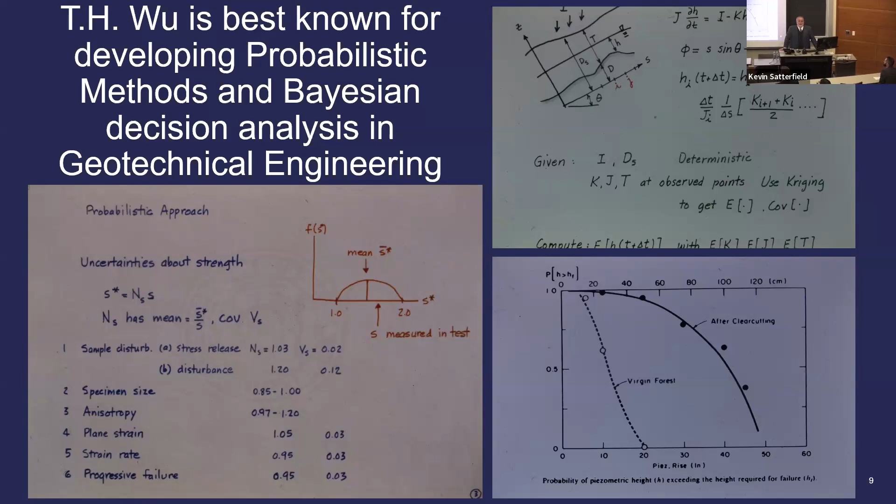Today, he's probably best known for his Bayesian decision analysis and the field many people today call georisk. There are conferences held on a routine basis. This is one I attended in Taiwan in 2019, where he was really honored, and everybody recognized that he was at the origin of what we sometimes call geotechnical reliability.

I loved his very simple 35 millimeter slides, almost all black and white, hand drawn, clearly showing the effect of groundwater, clearly showing the effect on stresses, and also how thorough he was. He would look at the effect of wind, for example, on the trees, the effect of reinforcement, the effect of changing angle of the roots as they're being pulled, and in many other areas he also had significant contributions.

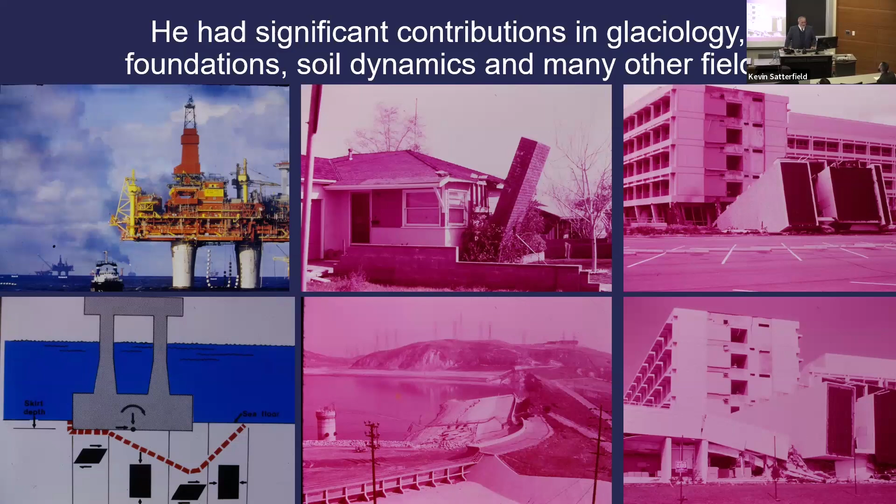He spent several months in Antarctica and wrote papers contributing to the field of glaciology. Through his life, I was able to see that he worked on areas I did not expect, like offshore platforms. But he also had a keen interest in the emerging field in the 1970s of soil dynamics, what later became geotechnical earthquake engineering. He wrote in 1975 a well-known and seminal book called Soil Dynamics, and a lot of the pictures involved, for example, the San Fernando Dam failure in 1971 in Los Angeles, the failure at Olive View Hospital. So he had many interests, not just related to georisk or biotechnical remediation.

He retired in 1994, but he remained constantly involved with the campus.

Even in his 90s, he would never take the elevator. He'd go the 4 floors of Hitchcock. If you wanted to hide from Th. Wu, one student told me all you had to do was go into the elevator.

I talked to him several times about his research. He was still doing research, still writing papers, and still working on the manuscript of a book.

One time I remember he came to me and said, Daniel, I need a genius. That's what Th. Wu would typically call students on campus - they were all geniuses. I said, what do you need a student for? He said, well, I have this slope that I reinforced for ODOT many years ago, and I'd like to go read some of the instrumentation. He was, I think, 89 at the time.

So I found a good student and told her, make sure you carry everything up and down the slope, make sure you take all the readings - he's 89 years old. The student came back and I asked how it went. She said, he didn't let me do anything. He was up and down the whole time, taking all the readings himself. I was just there watching.

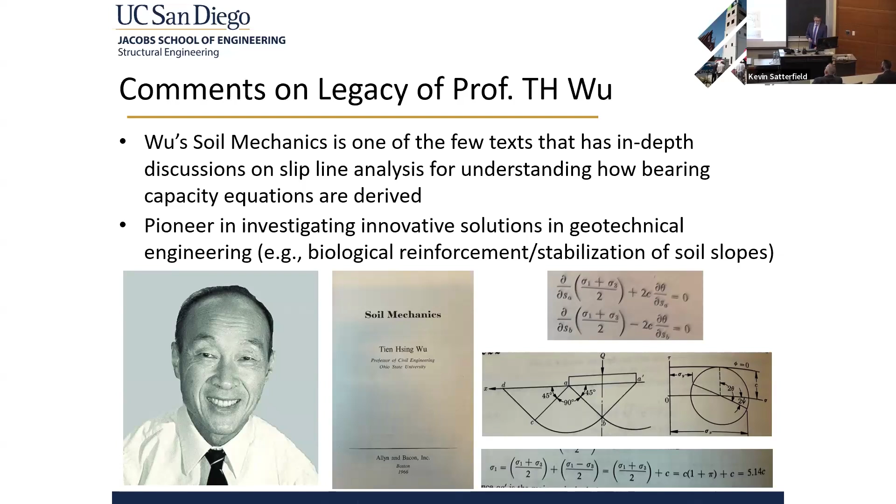These were both performed back when I was a professor at University of Colorado Boulder - one at U.S. Air Force Academy, and the other in downtown Denver. One focused on the response of single piles, and the other on the response of energy piles under building operations.

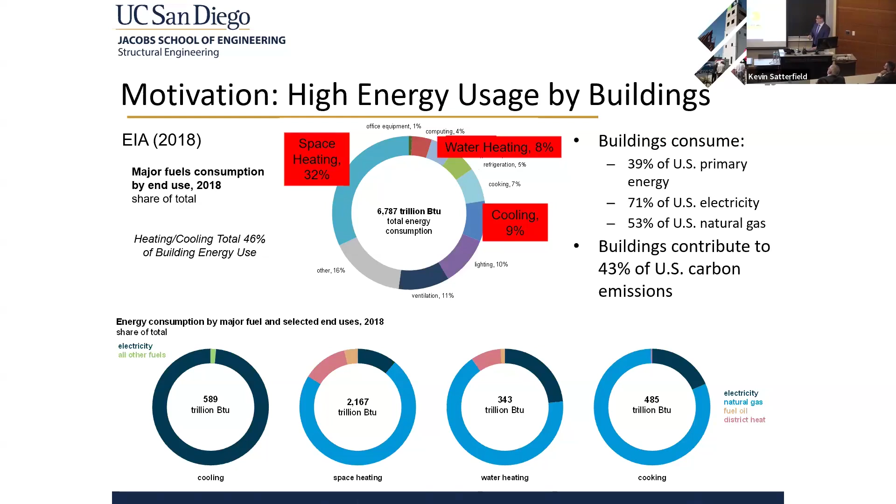I also wanted to talk about thermal energy in urban areas and some questions we have. We need heat for our buildings, so how can we obtain that thermal energy sustainably? Energy piles are the strategy I'm going to talk about today. But we also have a lot of thermal energy coming from the sun - are there ways we can harvest that heat and inject it into the ground to store it? There are some opportunities there, and energy piles are a good way to do that.

There are some risks if everybody adopts energy piles and every building has them - potentially we could have waste issues. We need to make sure that if we're rejecting a lot of heat to the ground, we're not contributing to the urban heat island effect. But energy piles are a good way to move heat from one place to another, so there could be strategies to take care of that. That waste energy could also be a resource we use to achieve other purposes, as I'll talk about in a second.

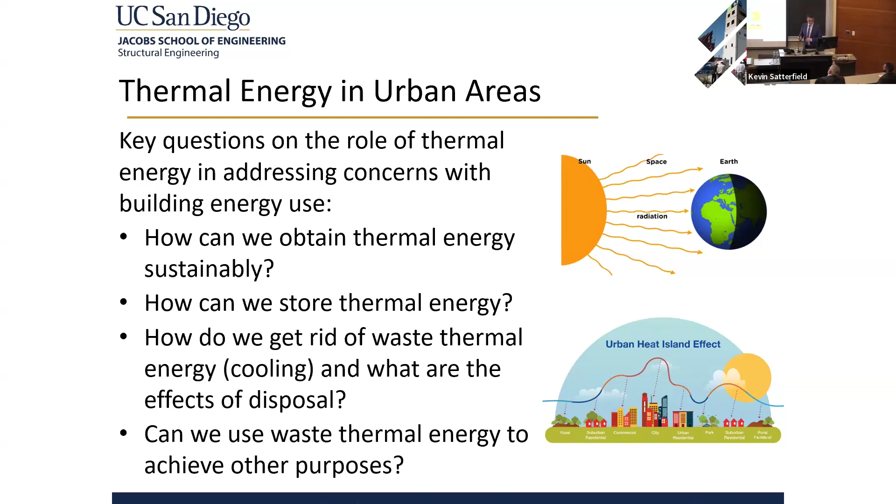Thermal energy comes from the sun usually, but the subsurface can play a key role in handling this. The subsurface is usually a good insulator. Soil has a mixture of air and water, and air is a very low thermal conductivity material, so it acts as an insulating material.

Heat transfer in soils can occur due to both conduction as well as pore fluid movement. If we have saturated soils, we could have groundwater flow that could take the heat away. If we have unsaturated soils, you don't have that groundwater flow, so there's more of an insulating effect, but you could have phase change, and that could lead to some interesting effects.

Mainly, geotechnical engineers, which is what we are, what I am, we're installing structures in the subsurface that we could be using for multiple purposes to transfer thermal energy.

So I've been trying to categorize thermal energy into 3 different categories. Thermal energy is a resource, so we can use this to transfer it to and from the ground to our building for space conditioning and displace technologies that may rely on burning fossil fuels.

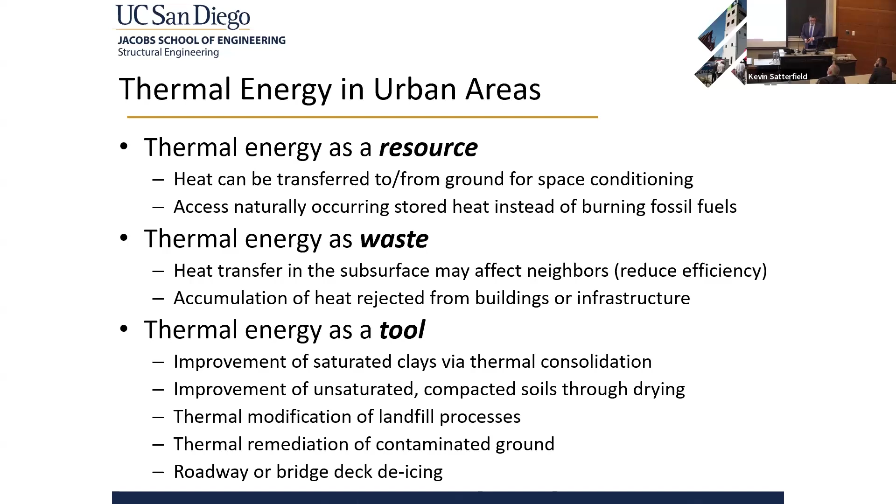The first is the improvement of saturated clays using thermal consolidation. And the second is using thermal drying to enhance the behavior of unsaturated compacted soils. There are other opportunities, modifying landfill processes, de-icing bridges, remediating contaminated ground that I'm not going to talk about today, but are other potential ideas.

One of the main tools that we're going to be using in energy piles is this concept of a ground source heat pump. When you think of geothermal energy, you're not necessarily generating energy. You're moving it from one place to another. And the heat pump is the tool that we're going to be using to do that.

We have two different loops, one in the ground, we call that the ground loop, and then we have our refrigerant loop. Three, if you want to consider the system that is distributing the heat to your building. The refrigerant is going to exchange heat as it changes phase as it expands and contracts. And we're going to be using that to extract heat from the loop that's going in the ground.

So when we want to heat our building, we're going to inject heat into the ground and extract, or we're going to put cold water into the ground and hot water is going to come back. And the refrigerant, we're used to using these in our conventional air source heat pumps that we have for air conditioning purposes.

But when we have an air conditioner, it's probably 40 Celsius outside, and we want our house to be 20 Celsius. So we have to reject heat at a much higher temperature so that we have heat transfer out into the environment. The ground is having a stable temperature all year round. So if you want to have your house at 20, you're just rejecting to that stable temperature, so that makes it more efficient. And if you install enough pipe in the ground, you can make this work in any location.

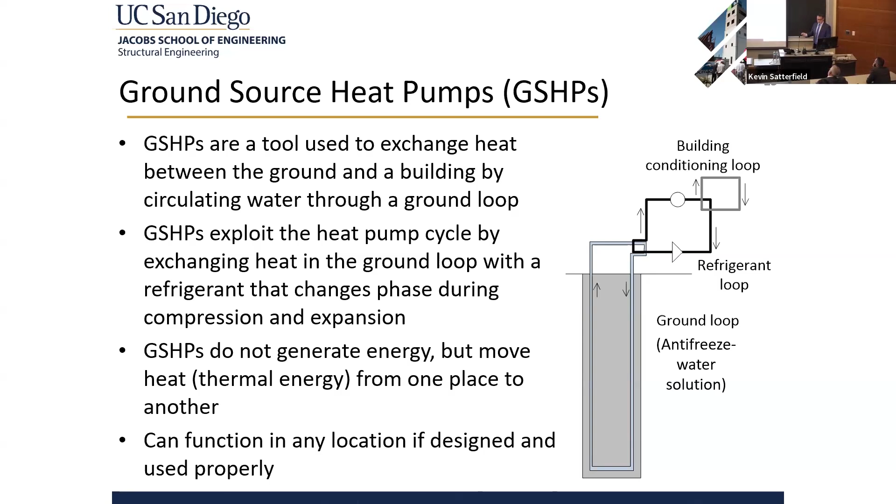These are just some more details of the refrigerant system, and noting some of the typical temperatures of the fluid when we're injecting into the ground. So when we're heating the building, we're injecting cold water into our ground loop, somewhere close to freezing, so we need to have an antifreeze inside of the ground loop.

When we're trying to cool the building, we're going to put hot fluid into the ground, and it's going to come back a little bit cooler. In most locations, the ground temperature is going to be equal to the mean annual air temperature, somewhere 10 to 15. San Diego is a little bit warmer, around 20.

Talking about energy piles, these are basically structures that serve two purposes. We're going to support the building, and we're also going to have heat exchange loops inside of them. These are closed loop pipes, usually polyethylene plastic, so it's flexible.

One nice thing is that because you're inside of the building, you don't need to provide trenches to go below the frost depth. You need to have all of your heat exchange pipes at the surface, connected together in a manifold and routed through the building foundation to a mechanical room.

These have all been studied for quite some time. I think the first applications were in the early 1980s in Austria. In the late 2000s, there started to become several research projects in the US, including one that I started at University of Colorado.

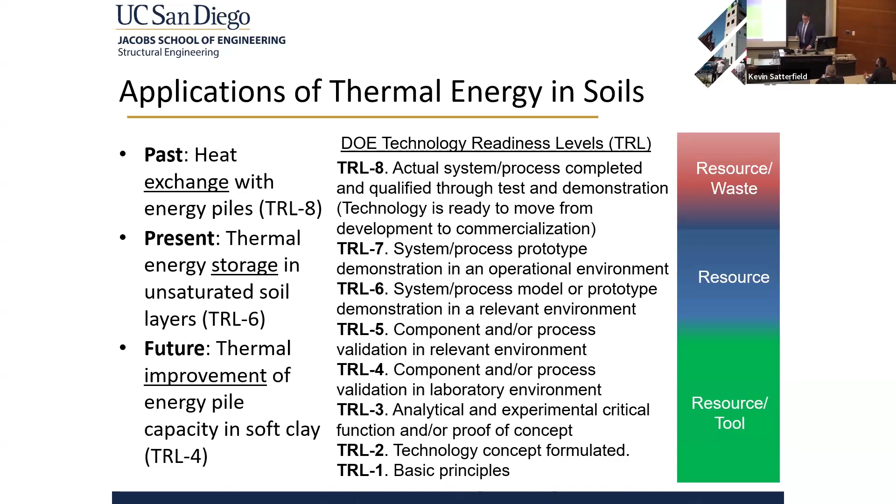So how are we going to design ground source heat pumps and energy piles? I mentioned that you need to have a sufficient length of heat exchanger in the ground so that when you send heat pulses from your refrigerant loop, they can be absorbed by the ground without changing the ground temperature. So this is the philosophy of heat exchange.

Heat storage, you want the ground temperature to increase. You want to store the heat in the ground. But for heat exchange operation, we want to be able to send pulses of heat, and then they get distributed to the ground without causing the ground to heat up. We also want to avoid thermal overlap between other heat exchangers.

These are some different rules of thumb that you can use for preliminary designs of these systems. Usually you need about 150 meters of heat exchanger per thermal ton, and the thermal ton is the amount of energy you need to heat or cool a space.

Energy piles are a little bit different than borehole heat exchangers because we're not going to make our piles longer to get more heat exchange capacity. The piles themselves are very expensive. The addition of the heat exchange tubing is only a fractional cost on top of that. So we're usually going to design the piles based on their structural requirements, and we're going to get whatever length we can have inside of the pile from that.

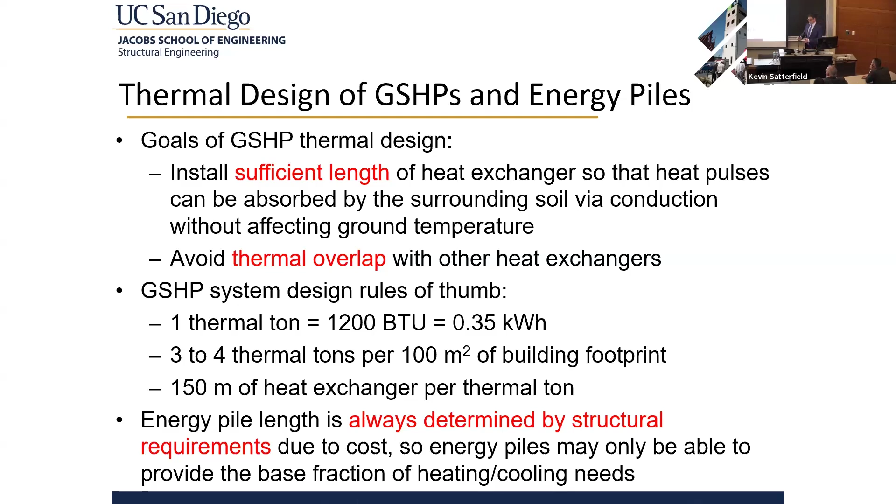There's been some different studies on the configuration of the heat exchangers to get the maximum energy out of it, but I'm not going to talk very much about that here. There's many different studies that have been performed. Mostly analytical solutions are the first pass, but there's been a lot of work on thermal finite element or finite difference approaches for heat exchange.

These are just some different references on the ranges of thermal conductivity that we're going to encounter. One of the limiting factors is this plastic pipe that has the lowest thermal conductivity out of the system. The fluid flowing through the pipe, we need to have a fast enough flow rate that we have turbulent conditions, so we have good mixing.

If we had laminar conditions, then you may have a stall out of the heat transfer across that fluid, so it needs to be mixing so that you evenly distribute the heat to the edges of the pipe, and then that gets distributed to the concrete and the surrounding soil. Soils usually have a pretty low thermal conductivity, and if they're dry, the thermal conductivity is lower than if they're saturated.

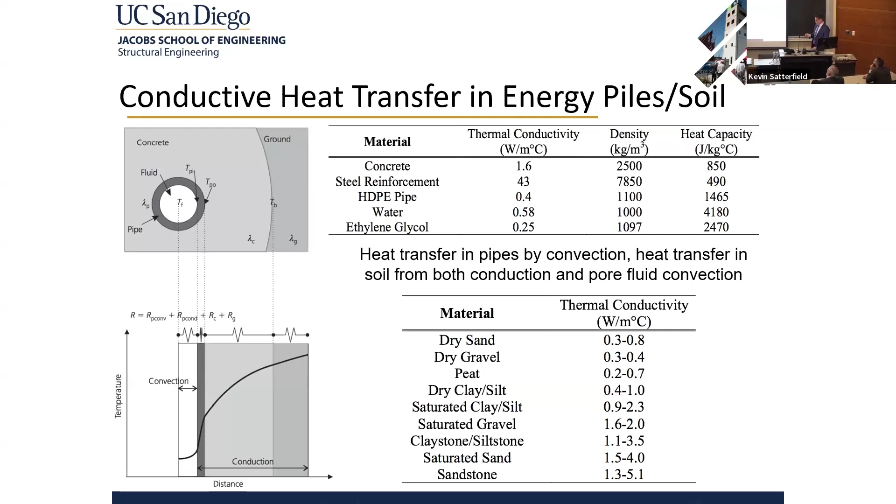One of the main ways that we quantify the system, as opposed to these individual components, is using a thermal response test. I'll show some results of these later. In general, people found that the length to diameter ratio for an energy pile is relatively small, but they have high heat transfer, mainly due to the density of the materials and also the geometric factor. So in these thermal response tests, you inject heat at a constant inlet temperature, and then you measure the outlet temperature as a function of time. From that, you can figure out the system thermal conductivity.

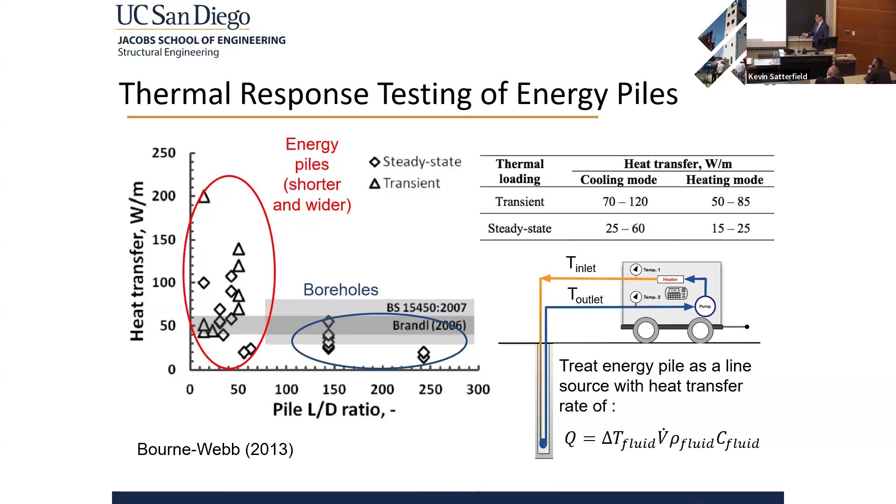The other thing that you need to think about is, yes, we're exchanging heat to and from the ground, but we're also going to have thermal expansion and contraction, and those are going to lead to thermal-induced displacements.

This is kind of the main thing that I was interested in when I started working on this. The tricky thing is that the restraint provided by the base, the toe restraint, and the building are going to prevent those displacements from happening. So if you prevent thermal displacements from happening, you convert them to stresses. We want to make sure that any stresses that do occur are within reasonable limits, the capacity of the pile and the strength of the concrete. And if displacements do occur, we want to make sure that they don't cause structural or architectural damage.

So these are just some schematics. We use different sign conventions than in structural engineering. We're using positive stresses for compression, positive strains mean contraction, and positive displacements are downwards. So if you're loading the pile from above using a compressive load, everything is positive, because that's the most common way that you're loading a foundation.

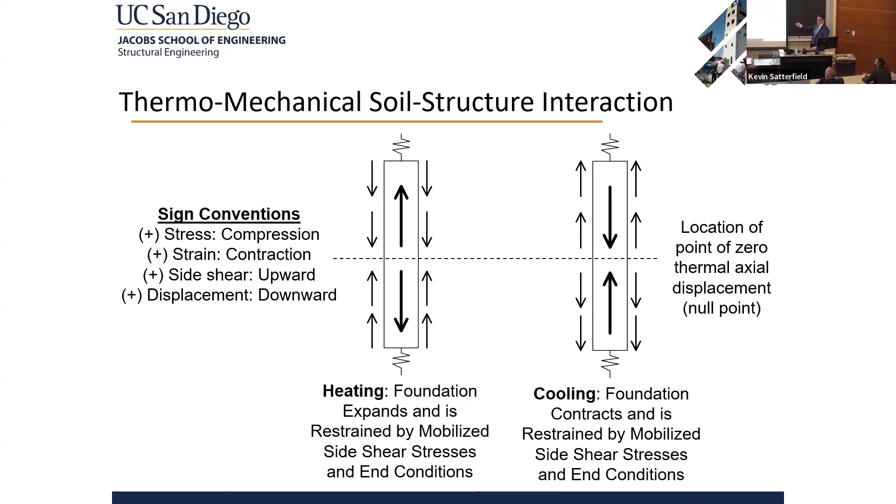When you heat the pile, it's going to expand about some point that depends on the boundary conditions. We can represent the end restraint using a spring and the head restraint where your building is by another spring, and then some other springs on the sides to represent the shear stresses acting on the pile. Depending on all of those conditions, it's going to expand about some certain point, and that's going to be the point of zero displacement, with the maximum displacement at the ends. When you cool the pile, it's going to contract towards that same location. We're going to call that the null point, the point of zero displacement.

These are just some simple cartoons that we can use when we start to see the data to put this into context. If we have a floating pile, one without any end bearing, we apply a load to it, and it's going to be dissipated with depth. This is just a linear distribution in axial stress. When we heat it, it's going to expand about that point and add some additional compressive stress to the pile. If we add the mechanical and thermal together, you get an increased compressive stress in the pile. You can also see that the upper part of the pile is going to be unloading, and the lower part of the pile is going to be loading even further.

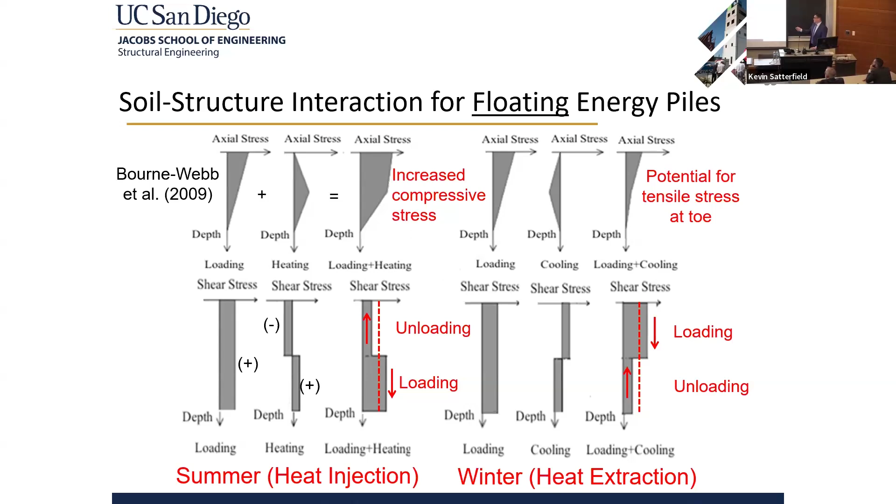So if you're trying to do a load transfer analysis, you need to make sure that you know which direction each part of your pile is going. When we're loading the pile mechanically, usually everything is moving downwards, but now it's a little bit more complicated. During cooling, you have opposite tensile stresses superimposed on top of your mechanical stresses. So one of the risks is that you could potentially have tensile stresses in the base of the foundation, and that could be a risk for auger cast piles where maybe the base of the foundation is not reinforced.

When we have realistic end-bearing restraints, it's going to change the shape of this stress profile. There's no restraint at the head and strong restraint at the toe, you're going to have this shape. Strong restraint at the head and none at the toe, it's going to have this shape. We'll see this in some real data in a second.

We have two different options to try to analyze those cartoons that I just showed. We can use coupled thermohydromechanical finite element analyses. These are good because you can interpret what's happening in the soil as well as in your pile, but it requires a lot of parameters and very advanced constitutive models, and validation can be very complex. So kind of the preferred method when you're designing these is the simple load transfer analysis using nonlinear springs to represent the side shear and end bearing.

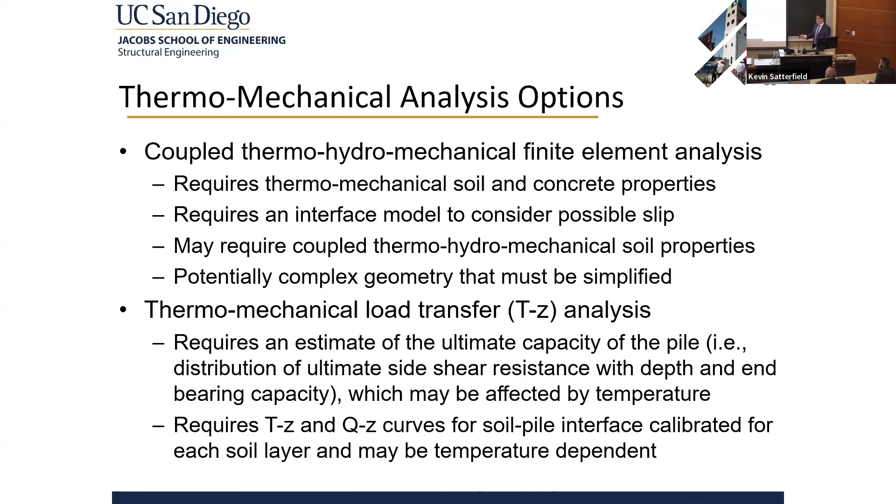Speaking of the effects of temperature on soils, I'm going to show some of these later in the presentation. We're going to have heat transfer from our concrete pile into the soil, and it depends on what type of soil we have, on what behavior we're going to obtain. If we have saturated soils, one thing that happens is that the water inside of the pores is going to expand 8 times more than the solid grains. So you can obtain this thing called thermal pressurization, especially in clay soils.

Depending on the stress state, as pore pressures dissipate, we could have thermal contraction. There's also some changes in the yield stress of the soil. When we heat it, usually the yield stress decreases, causing thermal softening, especially in overconsolidated soils. But this volume change due to outflow of water in normally consolidated soils causes hardening and an increase in shear strength. So in the last example, I'm going to focus on these normally consolidated soils, and we're going to see when we heat them, it causes contraction and an increase in shear strength.

This is kind of different than you'd expect for concrete or steel. When you heat them, they're always going to expand. But soils, depending on their stress state, could contract. Kind of a weird behavior.

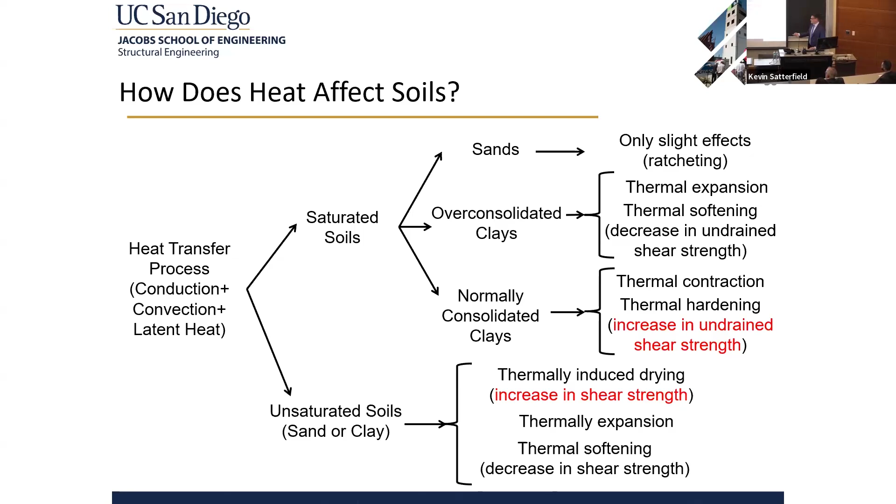Unsaturated soils are very complicated because when you heat them, you're going to cause phase change, and water is going to flow away from your heat source. That's called thermally induced drying. That's going to lead to an increase in suction and an increase in shear strength. You're still going to see a softening effect, but the increase in shear strength is greater than the softening we see. I'll also show some examples of tests where we observed that.

In addition to these coupled processes that have many parameters, we need soil-pile interface characteristics, which anybody who's worked with piles knows are very tricky to obtain, and the disturbance during installation really makes them difficult to predict without doing a load test.

I'm going to show some results of load transfer analysis instead, where we represent our pile with a set of linear springs, and then nonlinear springs at the toe and along the sides. One of the tricks here is that we need to input the ultimate pile capacity, which could be affected by temperature.

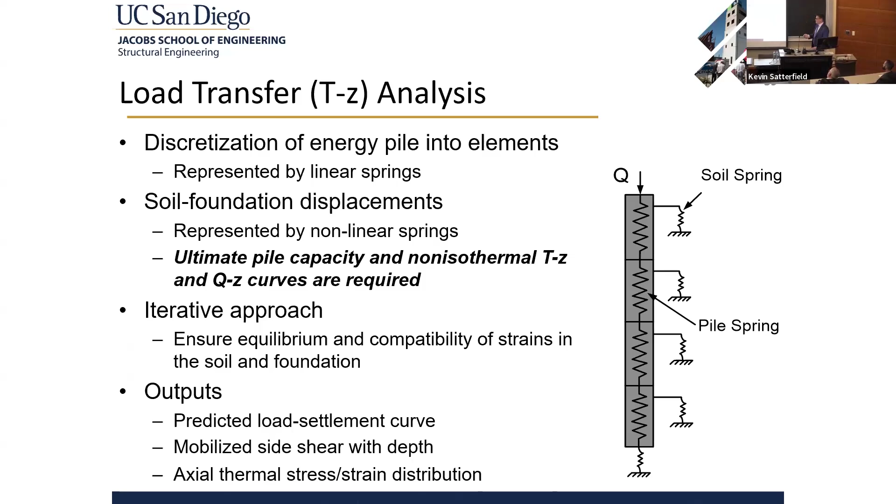The nice thing about these load transfer analyses is that it gives us our predicted load settlement curve if we do a mechanical loading test. It tells us about our mobilized side shear, and about the stress and strain distribution within the pile. Hopefully if we validate these enough with data, we can be using this readily in design.

We need to think about the effects of drainage during mechanical loading. Is it going to be an undrained material or a drained material? So we have a choice for undrained or drained. And then we need to think about the strengths that are going inside of those, the effects of temperature on the shear strength before the mechanical loading occurs.

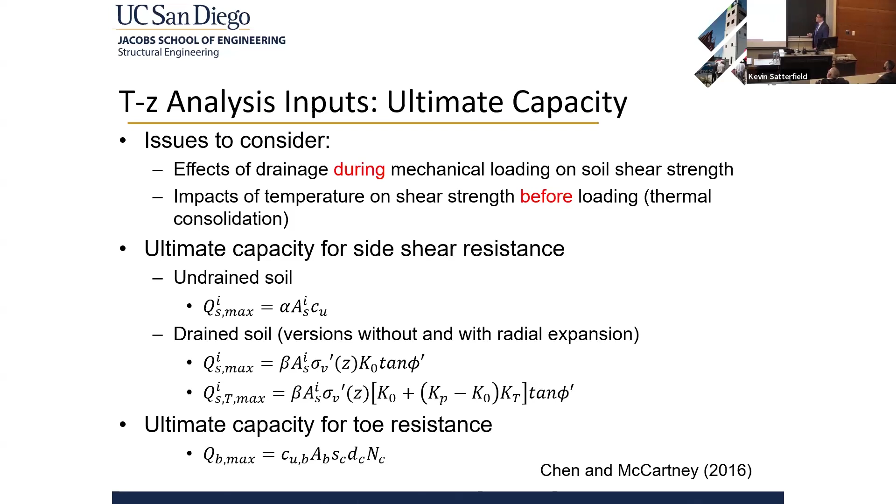Mechanical loading, these are easy. You usually apply a displacement at the toe and then iterate until we reach equilibrium. You apply the displacement at the toe and you can figure out what the load is at the top and go from there.

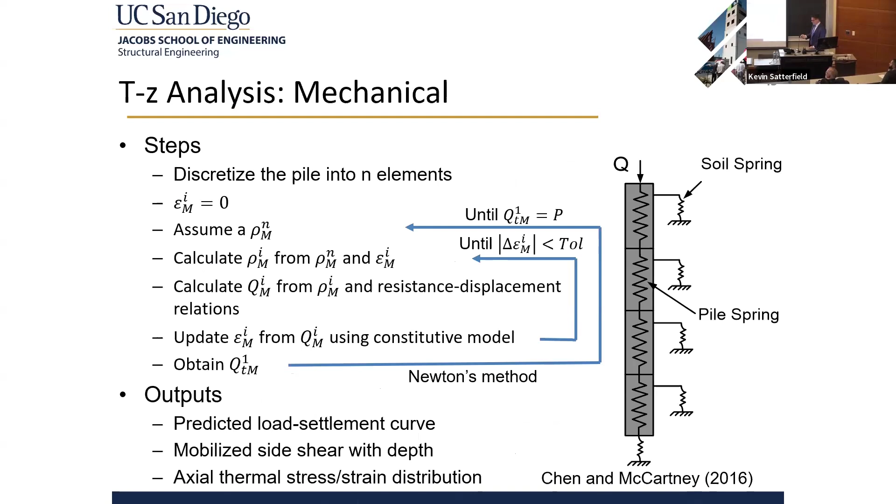When we do the thermal load transfer analysis, the interesting thing is that we need to have an additional spring at the head of the pile. And then we also have this concept of the null point, which is a point where there's no displacement. Different from the mechanical case where we apply a known displacement to the toe, we need to first make a guess at what that null point is, and then start to apply displacements from that point, thermal expansion from that point.

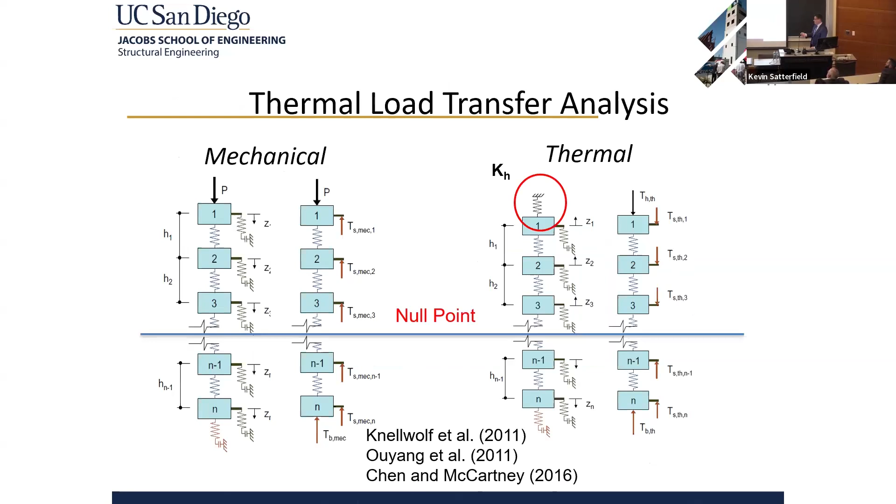If you heat the pile, it's going to expand by alpha delta T, where alpha is usually around 10 microstrain per degree C. We can use equilibrium of the pile to figure out the location of the null point, which is going to depend on the stiffnesses of those two springs.

When we have side shear, it makes things much more complicated. So we need to guess where the null point is, start with initial values from our mechanical TZ analysis, and apply an alpha delta T for each element. Alpha delta T is the amount the pile would expand freely if it was not restrained, but it's going to be restrained by side shear, so we need to adjust that until we find the actual amount of thermal strain.

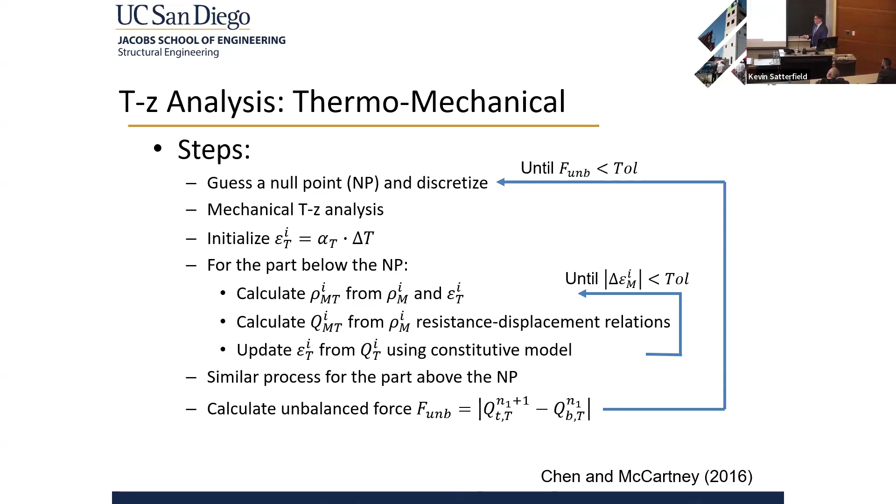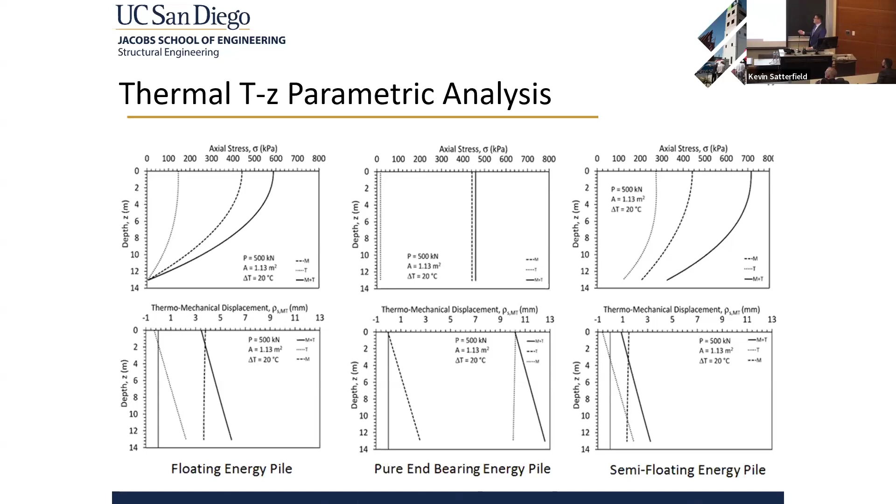If there's no restraint at all, the entire pile would just expand by alpha delta T. If there is restraint, it's going to be less than that. So we can go through some different examples. I'll show comparisons with field data later, but these are examples for a floating energy pile where there's no restraint to the toe, a pure end-bearing pile where there's no side shear, and a semi-floating energy pile, which is probably most realistic - high stresses at the head and low stresses at the toe.

Going on to a couple of the case histories. The first one is a shower shave facility constructed at the U.S. Air Force Academy. I worked on this with Professor Karen Henry there. An interesting thing about this project is it was a one-story building - it didn't need to be on deep foundations, but as part of our project they were able to add these foundations to their scope. I always joke that this is the strongest bathroom in the world, so if you want to visit, it's still there.

We had a series of 8 15-meter energy piles around the perimeter of the building. The Air Force Academy has an interesting program where, before they've taken any classes, they go out to this place called FERL, the Field Engineering and Readiness Laboratory, and they build things - retaining walls, excavations. They see how it works, then go back to the classroom and learn. So we gave them a nice bathroom that is warm, I hope.

The area there is mostly sandstone, with a little bit of sandy soil near the surface. We used a dry hole approach for the drilled shaft construction. I found out after we installed them that these were installed by a water well installer instead of a drilled shaft installer. Water well installers just want to go deeper than their required depth, so this driller drilled past our 15-meter limit and left loose material at the toe of the pile - loose sand at the toe. In the normal dry hole approach, you make sure you have a nice flat material at the base. We didn't need this for the capacity of the foundation, but it added some complexity when we looked at the results later on.

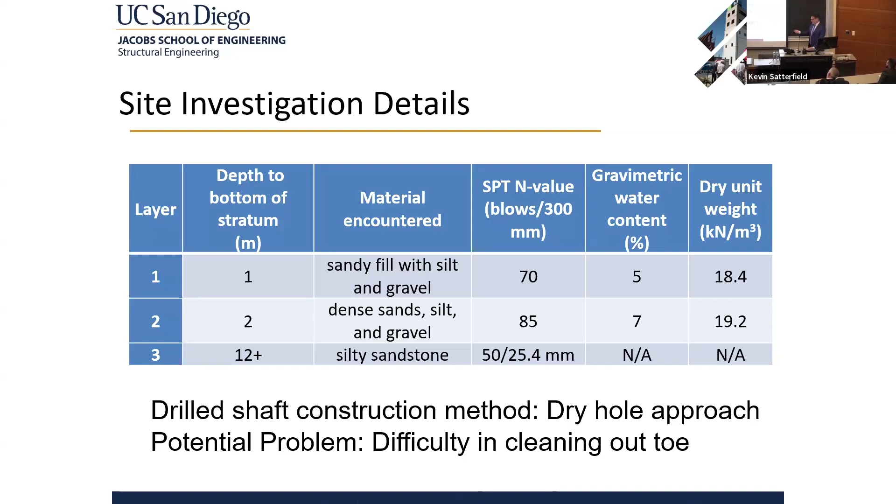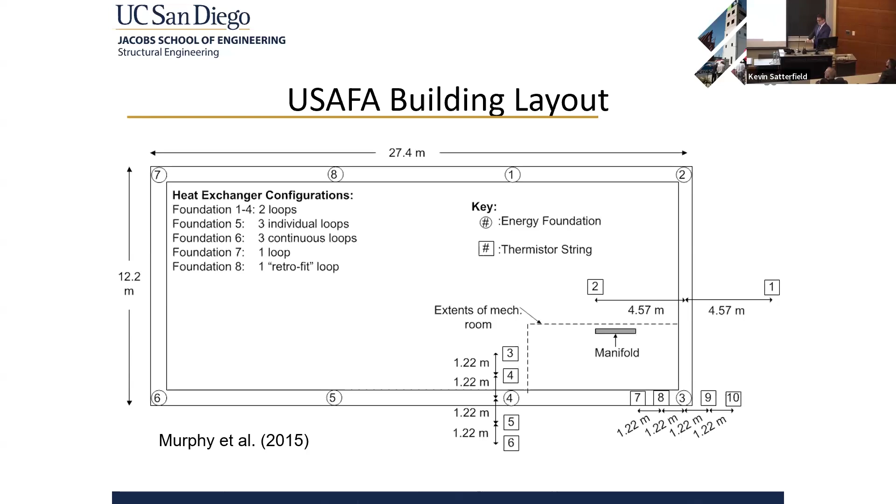So here's the layout. Two of the piles have instrumentation off to the sides, and piles 4, 3, and 1 have strain gauges throughout their depth. These were 24-inch diameter piles, relatively narrow, but you can see the pipes on the inside of the reinforcement cage. One of them we were looking at as a retrofit, where you would maybe core down through your pile and install a vertical heat exchanger into the middle.

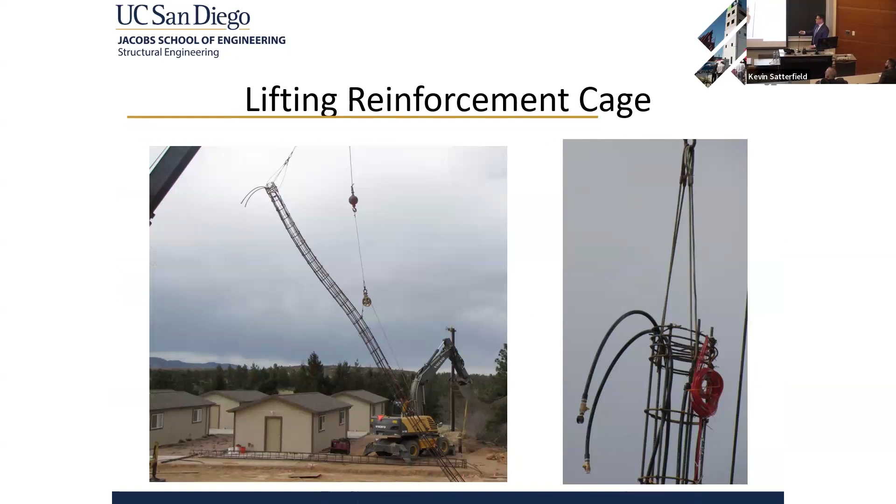To replicate that, we just had a pipe in the center of the pile that we inserted the tube into later. After we had these pipes attached, we pressurized them with water and had a valve at the top, which we could use to detect any leaks during the construction process. Then we needed to pick up these 50 feet by 2 foot reinforcement cages, which we did successfully without damaging any of our strain gauge sensors, and lowered that into the hole.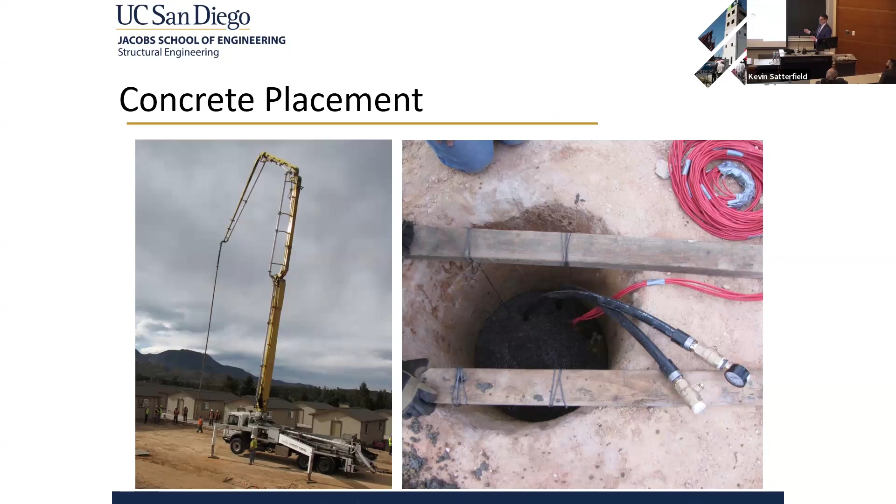You can see the dry hole here, and we tremmied concrete up from the base. You can see they're still under pressure, which was good - we didn't have any damage. Then we brought all of the pipes into our mechanical room. This picture saved me a lot of time at one point because all the pipes came in from different locations and didn't come in the right order, 1 through 8. Thankfully I knew where each thing was located so I could send the water to the right location after we poured concrete into all of this.

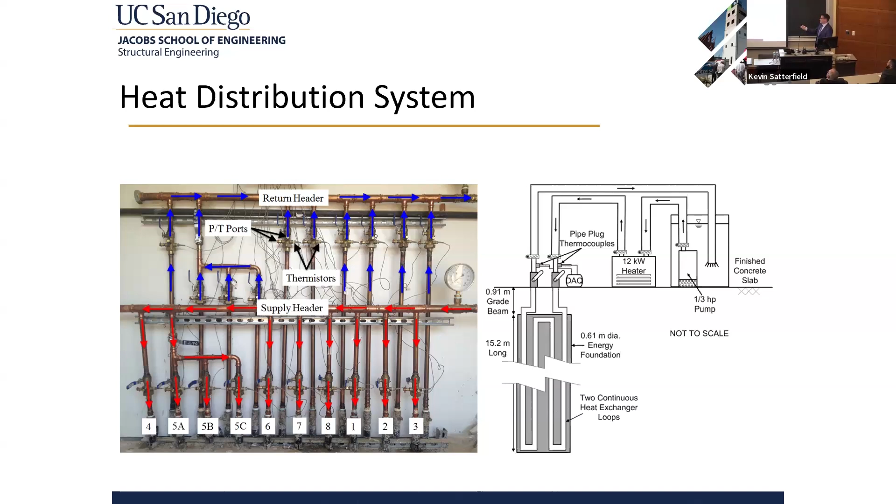So we made a nice mechanical manifold where we had heat going in one side and then the cold fluid coming out the other. We did some simple thermal response tests where we had a pump that circulated hot water through the pile, and we measured the temperature and flow rate going in and out.

And then we had our vibrating wire strain gauges at different locations along the pile. One tricky thing with these is that temperature causes issues because they work like a guitar string - you have a magnet that plucks the string. When you heat it, that string actually expands. So if you don't process the data correctly, it makes it look like your pile is contracting, even though it's expanding. But if you do these thermal corrections properly, you can see that the pile is indeed expanding.

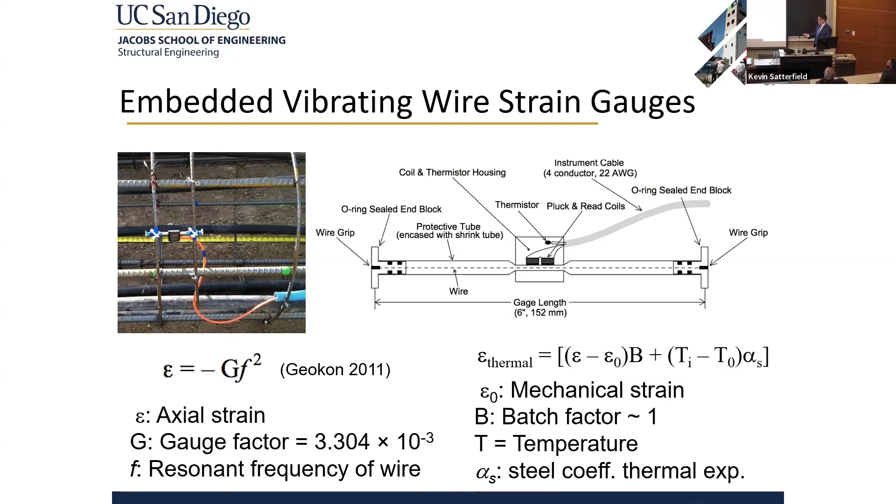This is what it looked like afterwards. We had a 3-foot grade beam, which added to the strength.

And then we waited some time for the concrete to cure. We were able to get the temperature profile at the site over the seasons, and the temperature, the strains during curing. And then you can see that the mechanical load due to the self-weight of the building was absorbed in the first 2 meters of the foundations. So we didn't really need to have deep foundations to support that load, but that's okay.

So these are the 3 foundations that had strain gauges in them. I have some papers looking at the details of the corner and interior piles. I'm not going to talk about that today.

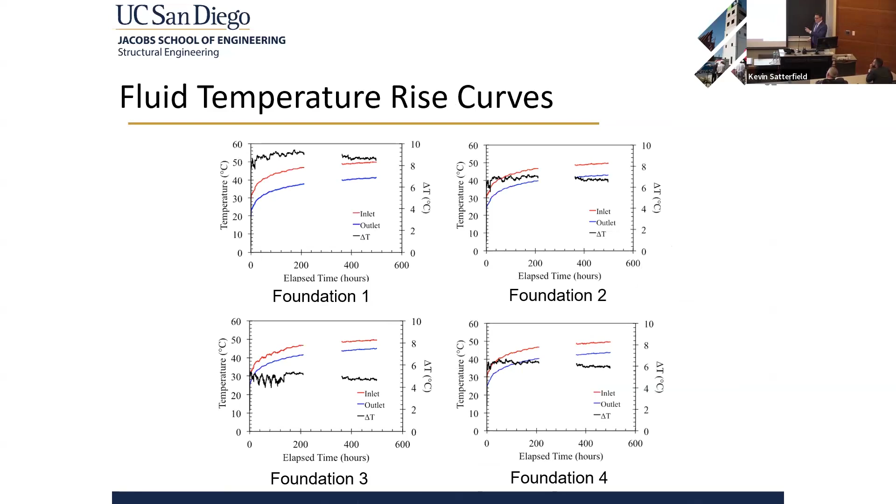We did our thermal response tests where we had a constant flow rate. Temperatures of the piles increased, and then the difference between the temperature inlet and outlet tells you the heat flux into the pile. Then we can look at the temperatures of the pile themselves. They're generally pretty uniform with depth, except near the surface.

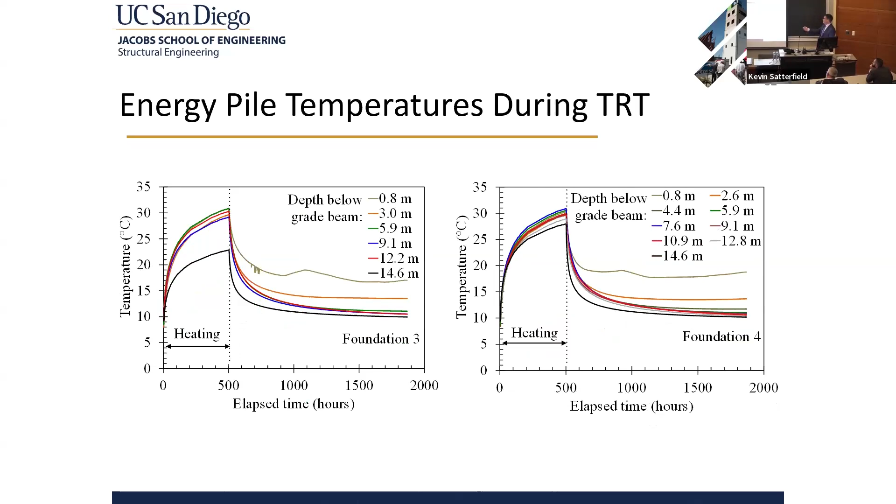We expected that the toe would have more restraint, but because of that loose material due to the construction technique that the contractor used, it was softer than we expected. We expected that this would go down.

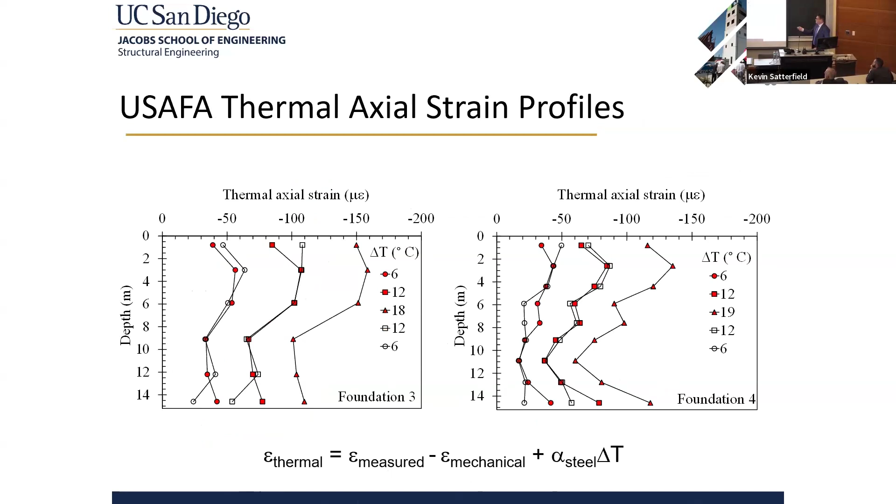We need to look at the difference between the actual thermal strain and the free expansion strain, and then multiply that difference in strain by the Young's modulus. And that gives us our thermal axial stress.

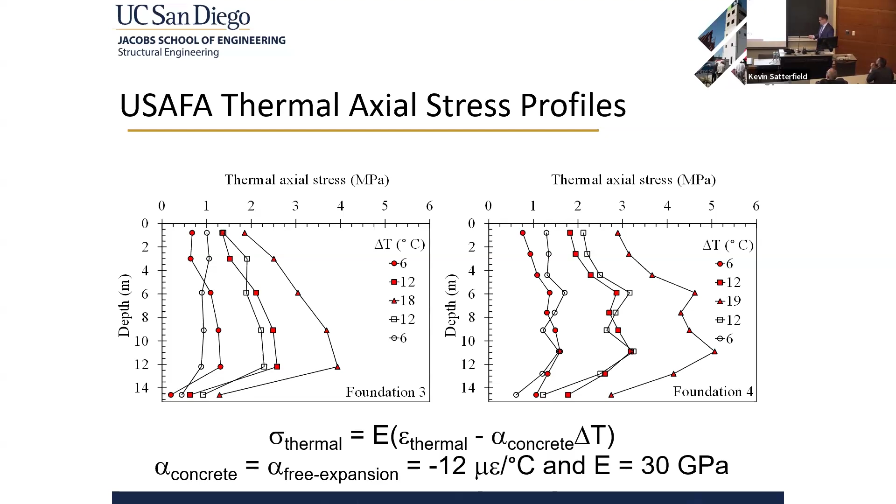So using that approach, we found that our thermally induced stress was 5 MPa. That's more than the mechanical stress applied by the foundation. So that's something that we need to think about to make sure that those induced stresses are less than the capacity of the concrete. But the compressive strength of concrete is 20, so we're well below that.

Assuming that the toe was fixed, which wasn't really the case, we could integrate the strains with depth and obtain the relative displacement. So we got somewhere around 1.5 millimeters of upward expansion during heating.

Just looking at some different angular distortions from the literature, if one of those was heating and all the rest were not heating, that would be your case where you'd have the most angular distortion. So the change in height over the span between the 2 piles, we were getting 1/6,000. So that's way less than would cause damage to a masonry building.

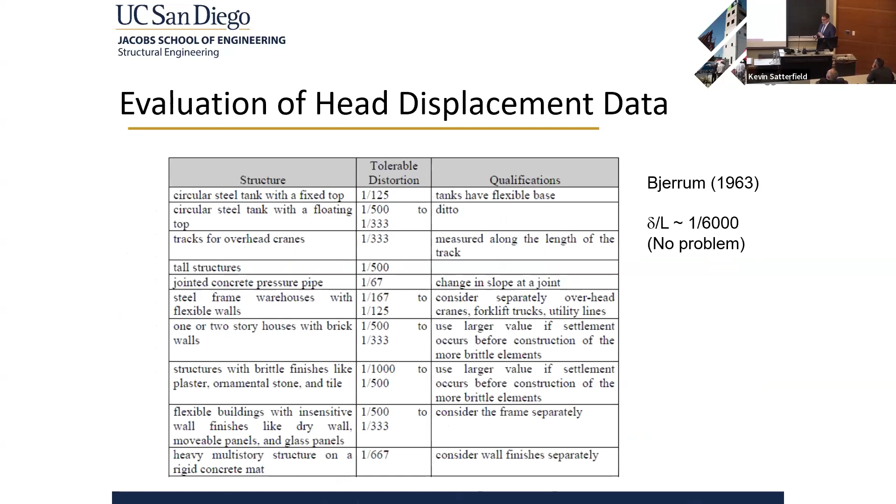So the amounts of thermal expansion and contraction that we're going to get are pretty small. The stresses induced could be high. We wanted to simulate these then with our load transfer analysis I told you about.

So we had a special device that we lowered down in the hole. It's similar to the handy borehole shear test. We expanded this against the side of the pile and pulled up. And we were able to get

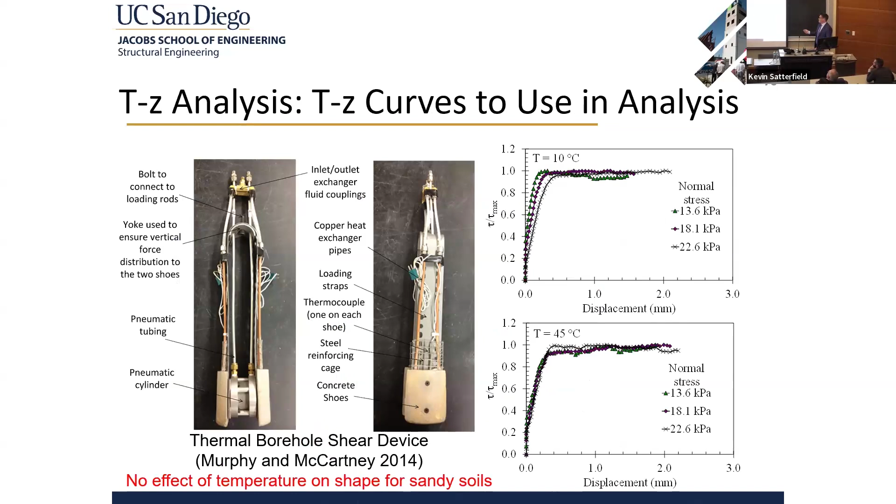these TZ curves for different temperatures and normal stresses, and temperature had a negligible effect. And we were able to then match these with our measured values, and we got good results. We did have to calibrate the pile, the springs at the head and the toe. We didn't know those a priori, but from the side shear, we got a good response.

The second case history, this one's a little bit shorter. This was a building that was being constructed in 2010 in downtown Denver. They were already installing a conventional geothermal system, and they said, do you want to come in and install a couple energy piles? So we quickly bought some sensors and came out there and tagged them onto the project.

They had 40 conventional geothermal boreholes. This is kind of noting that to get the heat necessary to heat and cool the building, boreholes needed to be 470 feet deep. So our energy piles were, again, about 15 meters long. We're not going to increase the foundations of the building to 470 feet to meet the heating demand. We're just going to carry the structural demand.

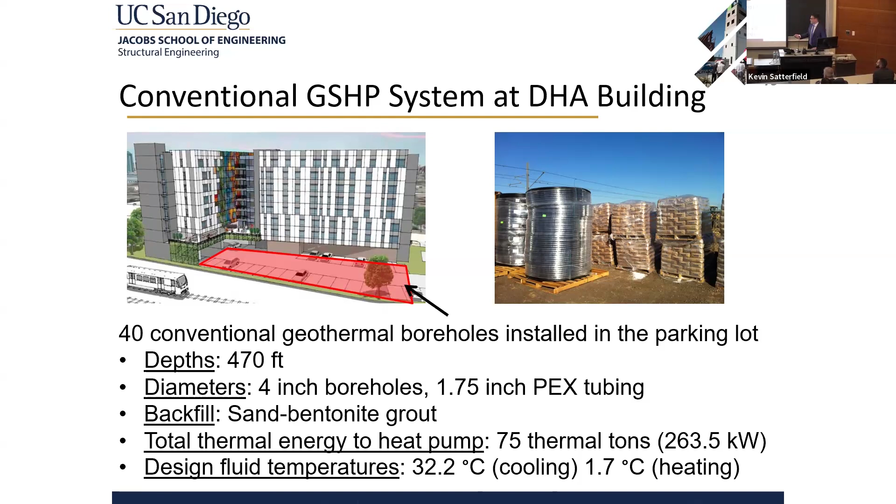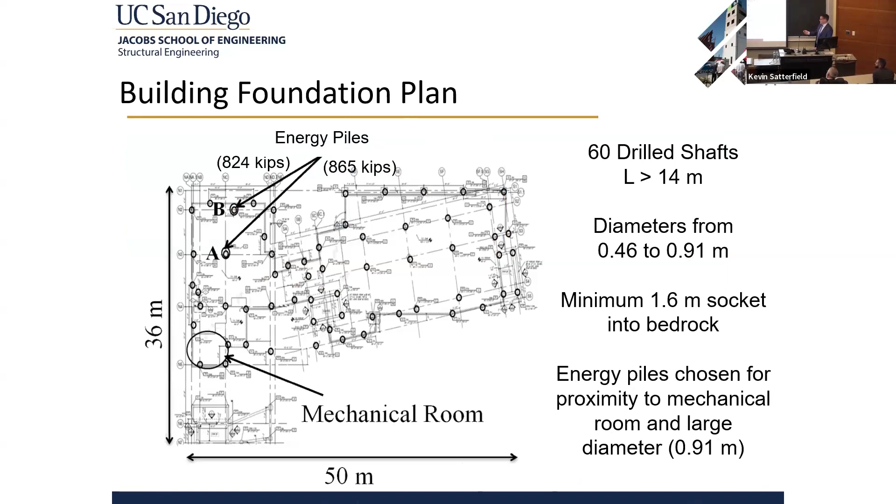This is the building footprint. We chose 2 different piles, A and B, to become energy piles, and we had to route the tubing over to the mechanical room here. These are larger diameter, about 1 meter diameter, and they go through this Denver blue shale, which we found was an interesting material that was sensitive to temperature.

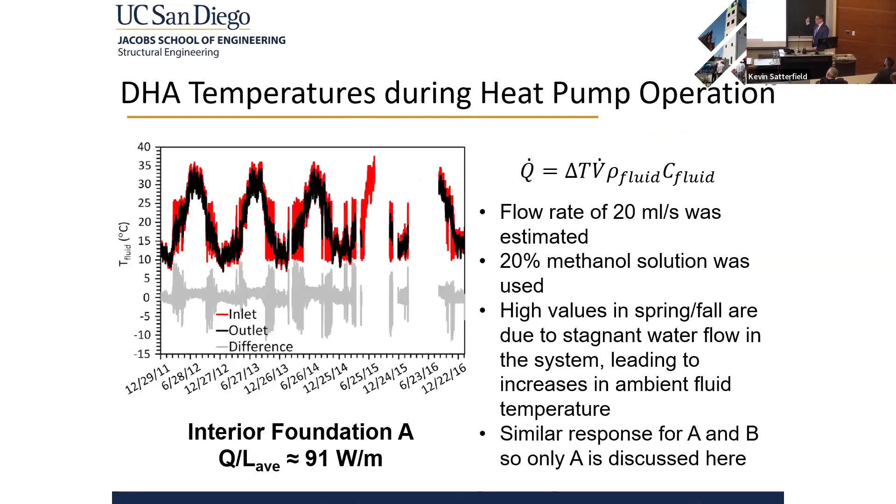So these are just the operations of the energy pile with time. We looked at the heat transfer, and we got about 91 watts per meter, which is consistent with what I showed you in that graph before. These are the temperatures over time. It follows kind of roughly sinusoidal trend. My graduate student forgot to reconnect the data acquisition system on a few different occasions, which gave me some heart attacks at the time, but you can still see the trend if you look at it carefully.

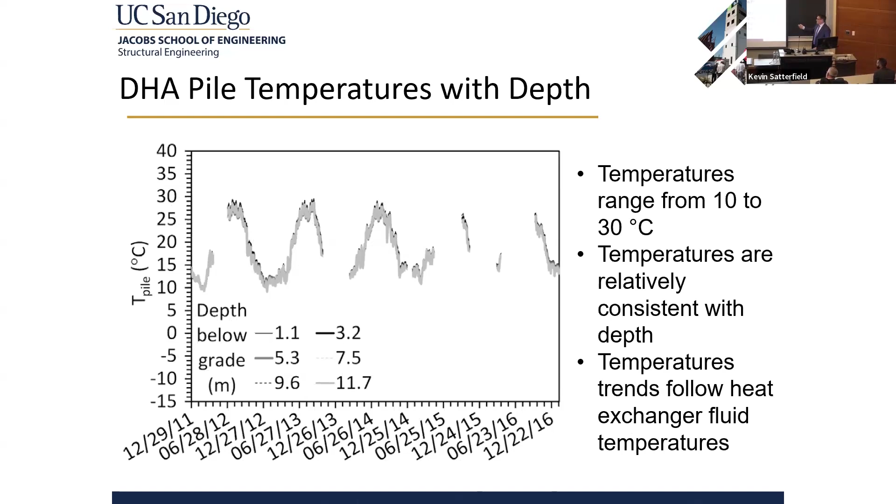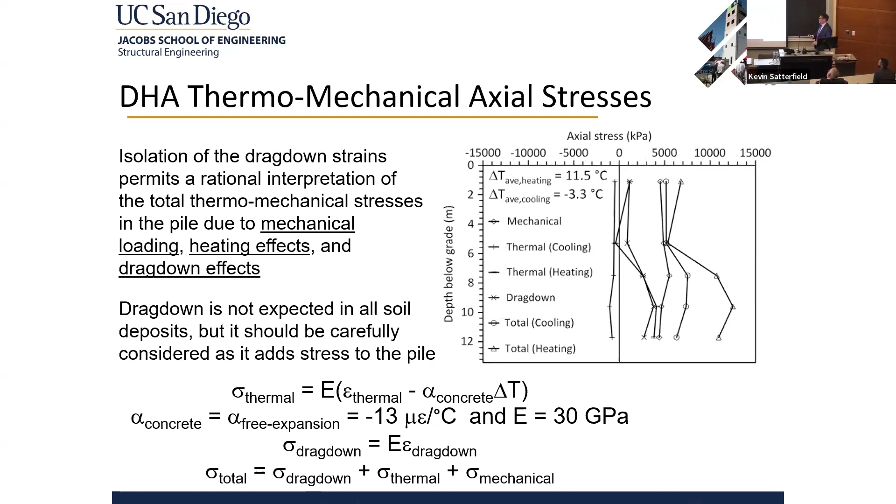But even then, our mechanical load, this one has a 5-story building on top of it. In addition to the heating and cooling, we're still only around 12 MPa, so we're still within the limits of the stresses. In this case, we're having both heating and cooling, so we can have contraction and expansion, but we're still within that 1 to 1.5 millimeters of displacement.

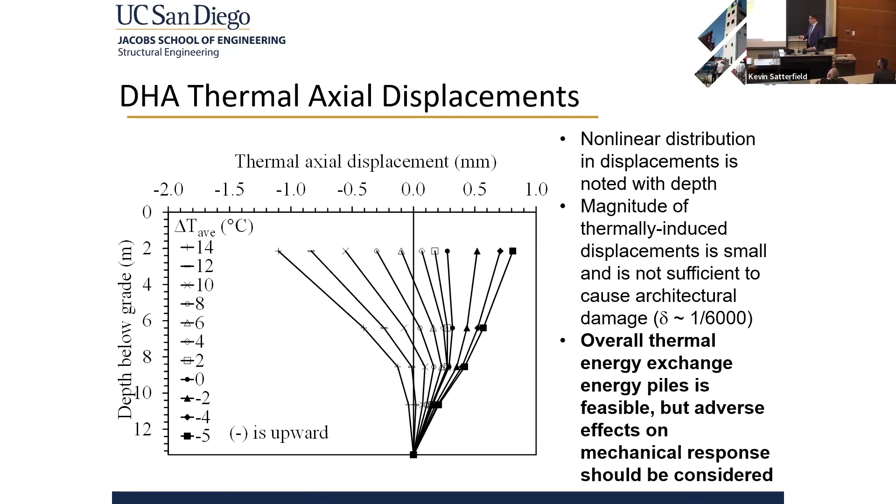Before I talk about the other two applications, I just wanted to note about thermal energy as a waste. There's been some studies, like regional scale studies, that if everybody were to adopt heating and cooling, you could have some locations in cities that become hotter than others. These are residential areas and commercial areas.

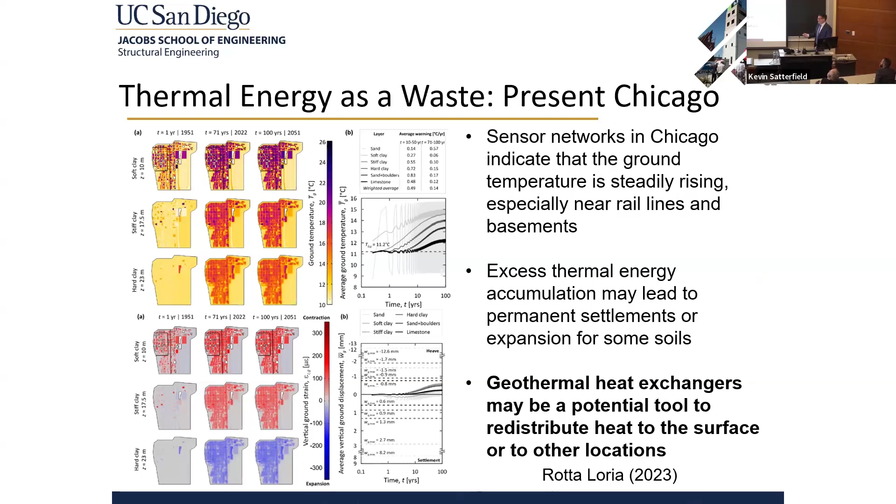So that could be a risk. If you use a district heating system for our geothermal, we could potentially transfer that heat from one place to another. There's been a lot of work by Alessandro Rotta Loria at Northwestern looking at heat island effects in the Chicago area and potential thermal deformations. I won't go into detail about that, but these are areas that you may need to watch out for.

So the second topic is the storage of thermal energy in the subsurface. We had a project where we were looking at collecting heat from solar thermal panels and injecting that into the subsurface, and in particular into unsaturated soil layers.

Most of the US has abundant solar thermal energy. However, it's only available during the day and usually only in the summer. So we need a storage system that we can use to access that heat in the winter. These locations in Denmark and Canada, they're very far north, they're very cold regions. They have 98% efficiency using these approaches.

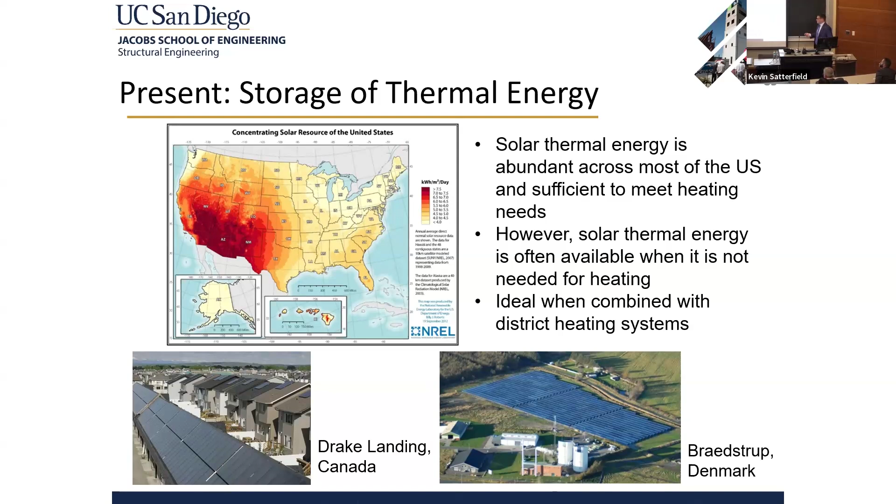So the way that these approaches work is you have a set of closely spaced boreholes, and in our case, we're going to also have closely spaced energy piles, and you inject heat into the center of the system under high temperatures up to 90 Celsius, so much higher than those temperatures that we encountered during heat exchange, which are around 35 Celsius. You wait some time during the fall, and then extract heat during the winter to heat your building.

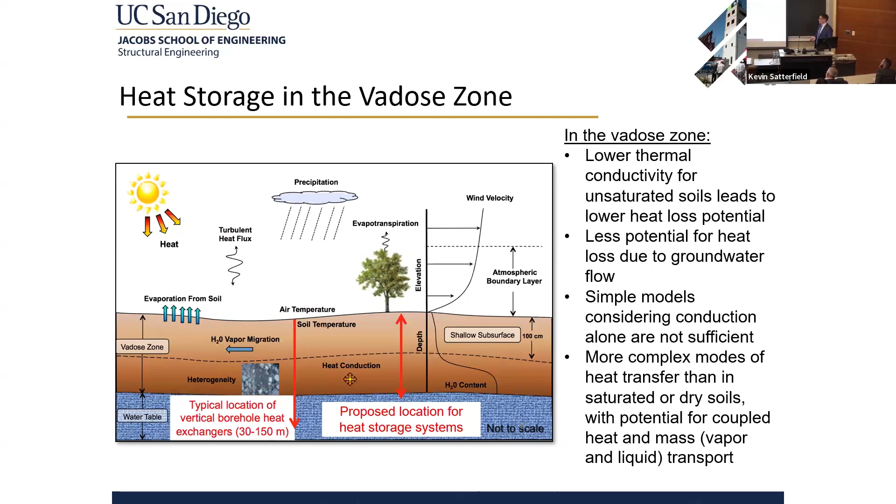In the locations that have been studied in Denmark and Canada, they were in places where the water table was very high, and there was actually groundwater flow that was taking the heat away with it. So we have advocated installing these into the unsaturated soil, the vadose zone above the water table. One nice thing is that there's less potential for groundwater flow, and the soil has lower thermal conductivity, so there's more heat storage. However, you need to consider other mechanisms of heat transfer, phase change, and then vapor flow.

Because this is very complicated to study in the field, we've looked at this using boreholes in the field, but we've mainly been focusing on centrifuge tests. This was a study I performed when I was at University of Colorado. We wanted to look at the effect of heating on an energy pile in unsaturated soil on its strain distribution and also its ultimate capacity.

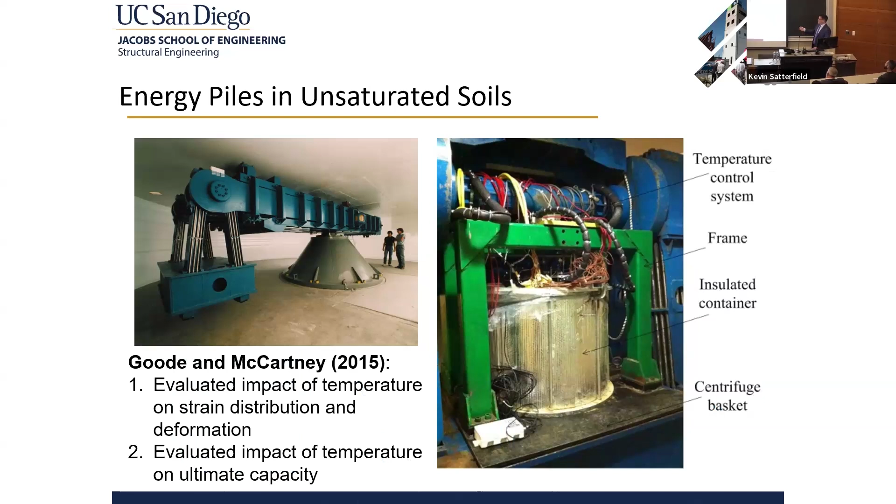In this case, we have a tank with an energy pile in the middle of it. We use centrifuge modeling because we can scale the stress state, so we can have a reduced scale model that has the same stress state as in the field prototype. We can scale things like time and other variables to have similitude between the two.

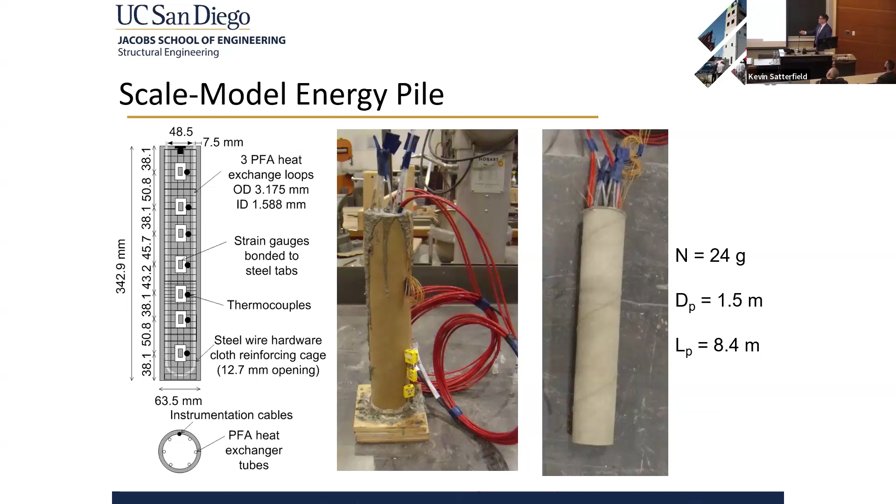This is our scale model energy pile that we looked at for the unsaturated soil tests. It's reinforced concrete with chicken wire and different strain gauges, which is pretty tricky to build. We had a heating unit that went through some slip ring stacks down through our energy pile in the centrifuge, spinning around at 24 Gs.

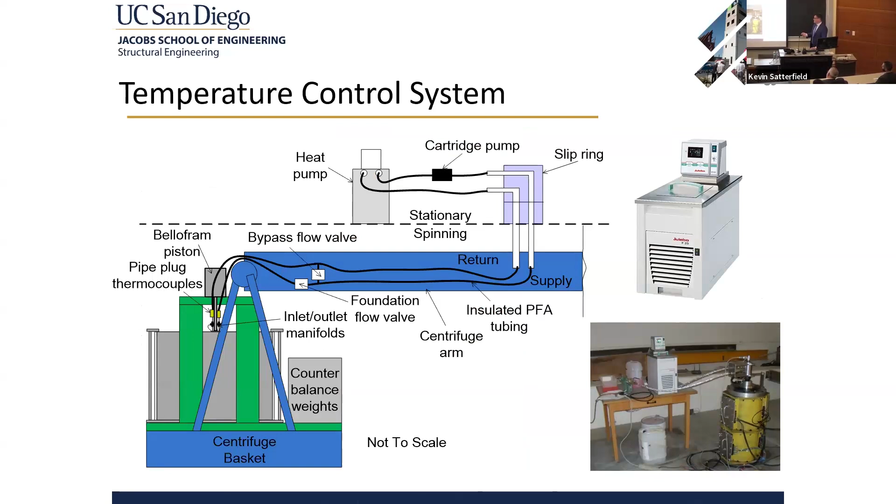Then we made measurements. We heated the pile to different temperatures while it was under a seating load, and then loaded it to failure. That's something that is hard to do for an energy pile in the field, but it's easy for us to do in the centrifuge.

First, we did tests on sand. We heated the pile to different temperatures, measured the load settlement curve, and there was no effect of temperature.

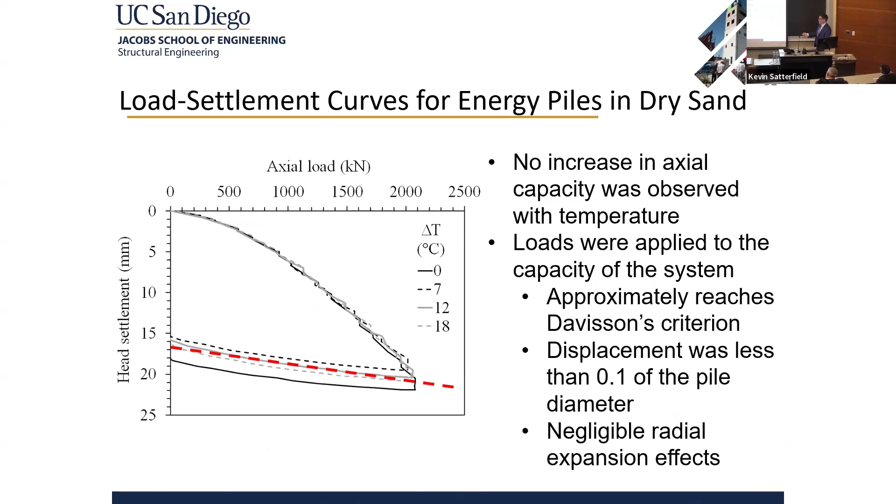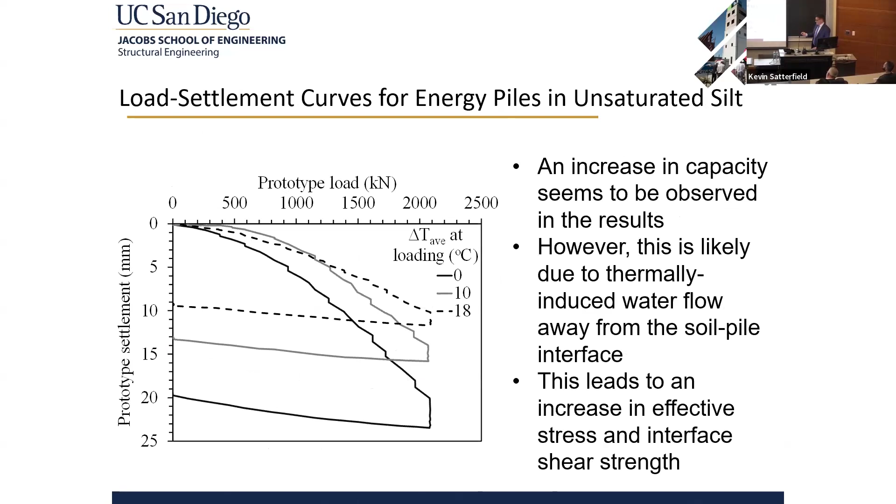This was the case when we measured it using different sensors located at different locations from the pile. As the soil became hotter, it became drier. These measurements are nice, but you can't have a measurement right at the pile interfaces, which is what we need to do a load transfer analysis.

So we need to complement that with modeling. We went into COMSOL and looked at a heat transfer model that was coupled with liquid flow, gas flow, and phase change. This is a non-equilibrium phase change model, so it's very complicated.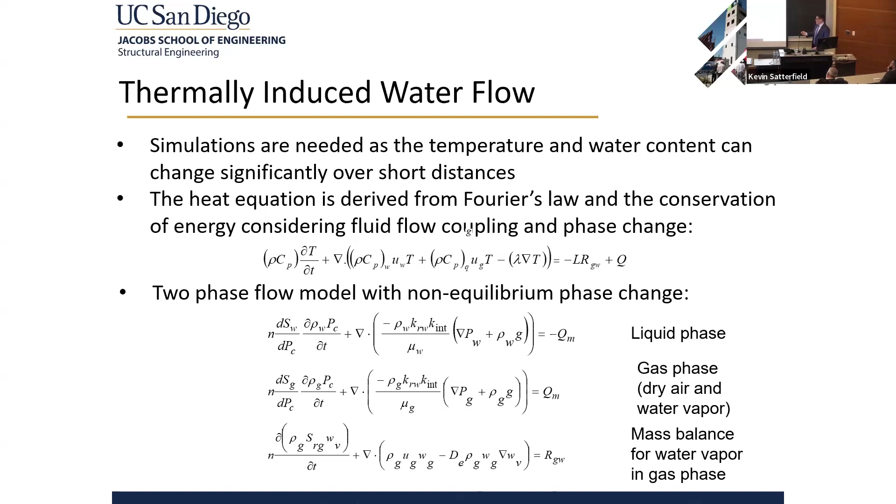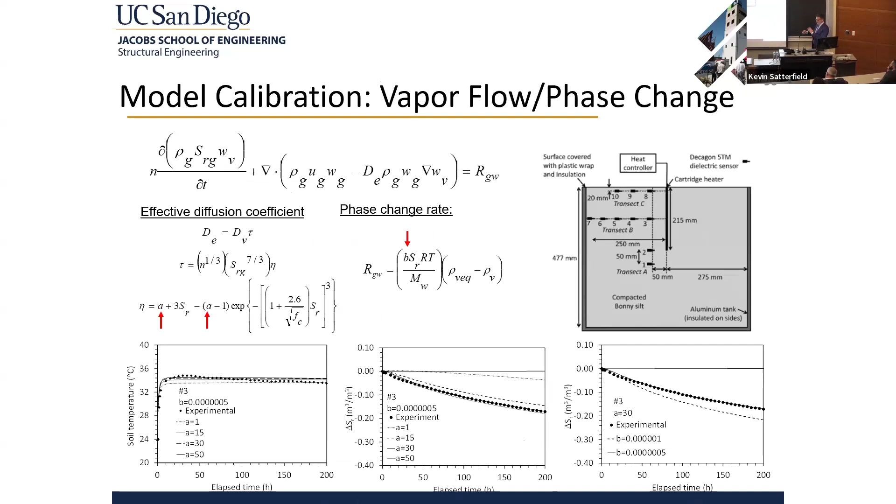We needed to calibrate that using some different parameters for unsaturated soils. We also needed to calibrate the phase change rate and the effective diffusion coefficient using some tank tests. We did all this in support of trying to simulate what happened in the centrifuge test.

With that, we could simulate the temperature distribution and the volumetric water content distribution. These are our measurements from the test, and we had pretty good match with those. As you see, when you heat the soil by 10, by 18, it causes the water content to decrease right at the pile interface, and that causes the effective stress to significantly increase right at the pile interface.

I'm a big advocate of using effective stress for unsaturated soils because you can consider both suction effects as well as degree of saturation effects.

So now that we know that the effective stress is increasing at the pile interface during heating, we can put that into a load transfer ultimate capacity analysis, and we were able to get very good predictions of our ultimate capacity as the pile is heated.

So with this case, we're proposing that when we store heat in energy pile arrays, we're able to not only increase the temperature and store heat, but we can also increase the capacity of our piles.

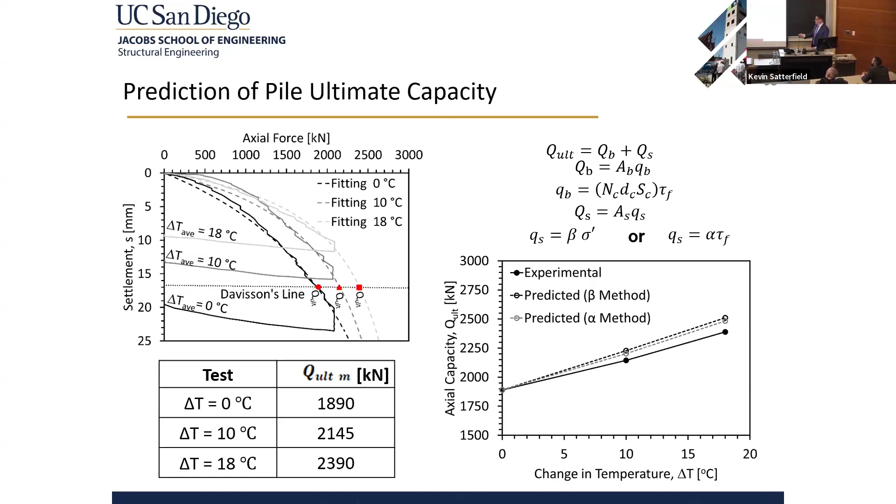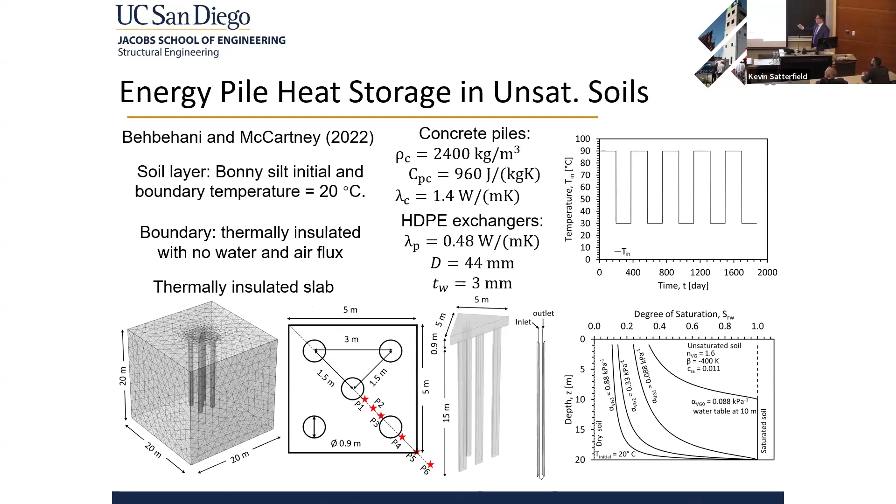We've also done some simulations where we have a group of energy piles and we heat it and cool it over several seasons to see how this is affecting the behavior of the soil. This leads to large increases in temperature in the region of the pile, and also decreases in temperature and degree of saturation around the pile.

Over time, usually the efficiency is going to increase. Whenever you're doing borehole thermal energy storage, there's always going to be losses into the outside of your array just due to natural conduction. But when you extract heat, you're never going to extract all of it, so the next season, when you inject heat, it's going to be a little bit more efficient.

In this case, we show the saturated case being the most efficient, but you have to also note that if you have saturated soils, there's usually going to be groundwater flow. So this would only be the case where the saturated soil will be statically there without any groundwater flow.

Okay, so the last topic I want to touch on is the future, using thermal energy, which could be waste heat but also from other sources, to improve soils. In this case, we're going to try to heat our energy pile in the ground and keep the temperature constant for a certain duration.

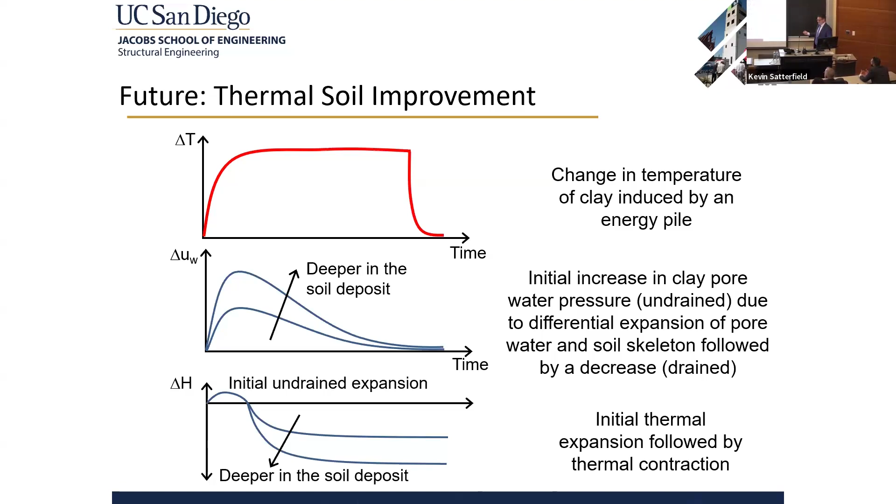While the soil is being heated, it's going to increase in pressure due to this differential thermal expansion. We've done studies showing the deeper you go in the soil profile, the higher your pore pressure will be. Initially you have thermal expansion when the soil is undrained, but as pore pressures dissipate and move to other regions, you get thermal contraction, which leads to a decrease in void ratio and an increase in shear strength.

We proved this with different thermal triaxial tests, measuring shear strength at room temperature, then heating it and measuring shear strength when hot, then cooling it to measure shear strength when cold. In all cases, this heating-cooling cycle led to an increase in the undrained shear strength of the saturated soil.

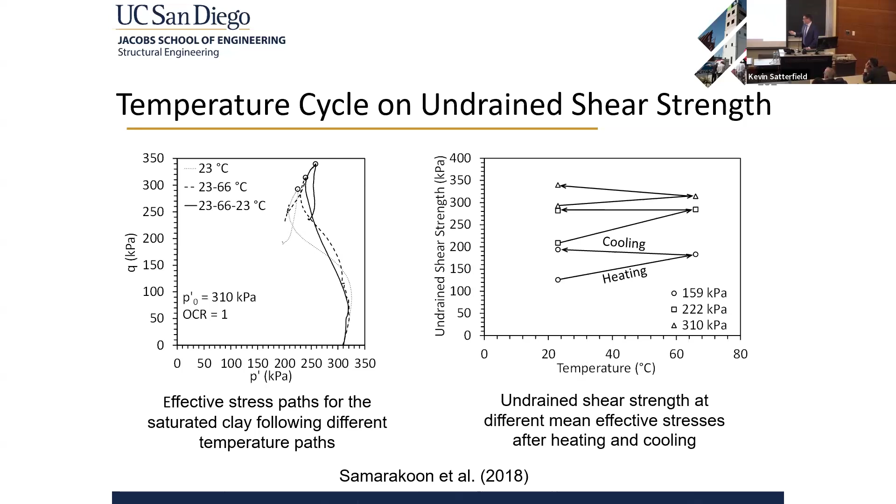So we spin the centrifuge up, install the pile, heat it, wait for these processes to happen, and then pull it out to measure the pull-out strength.

I'll get to the results right away. The higher the temperature we apply to the soil and go through this thermal improvement, the higher our capacity. Our capacity could increase by almost 100%. This was very repeatable for different pile types and different head restraint types, so we're very pleased with the results there.

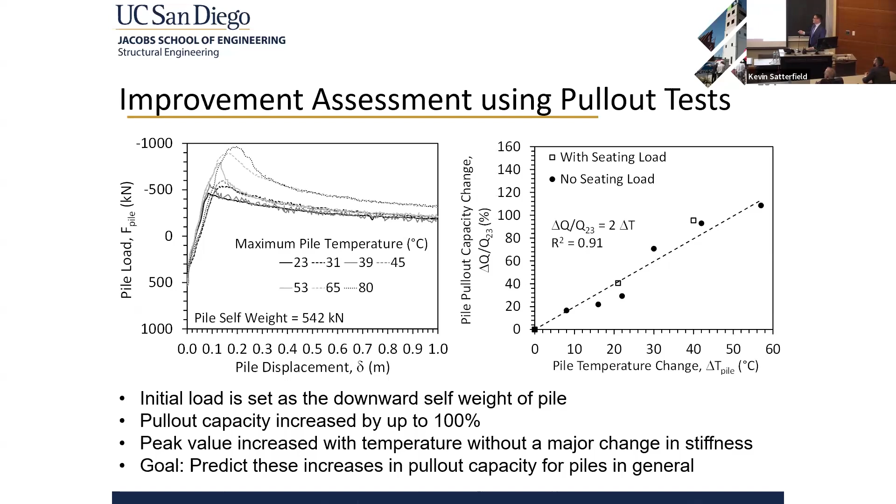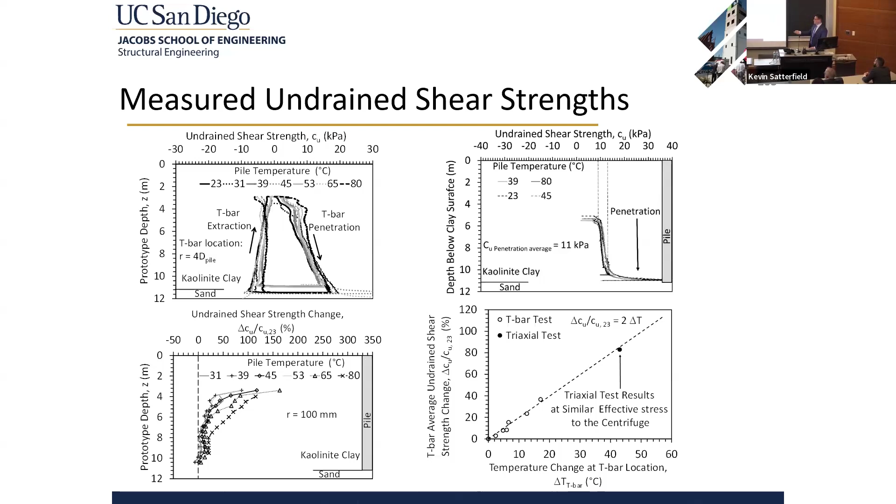We found that the undrained shear strength is very sensitive to the void ratio in the soil, and the higher the temperature we apply, the greater the shear strength increase will be. We have more of an increase in shear strength near the soil surface than deeper in the profile.

The first thing we did is use some thermal pressurization techniques. These were developed by Mitchell back in the 70s. We enhanced them a little bit more to better estimate the parameters going into these models.

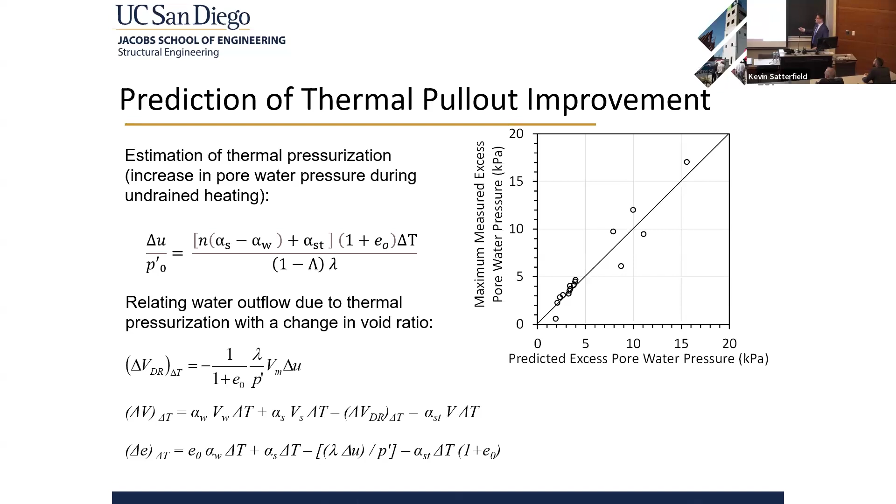If we know what the change in pressure is in the soil due to a change in temperature, we can estimate the amount of water that's going to flow out. And if we know the amount of water that's going to flow out, we can look at the change in void ratio. So this is our pore pressure equation, measured versus predicted, and we got a pretty good prediction there.

And then we know that if we have a change in void ratio, we should also have a change in undrained shear strength. So we used the Cam Clay model, with a normally consolidated soil in this case, to obtain the undrained shear strength as a function of void ratio at failure. You can see our measurements from our T-bar tests match up well with that model, with a correction factor to account for overconsolidation ratio and stress-induced anisotropy differences.

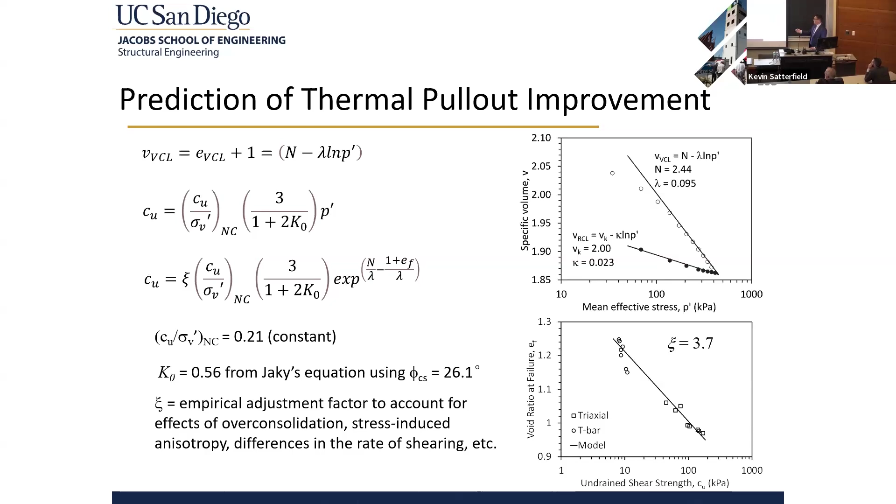But then we could take that shear strength and put it into our alpha capacity model, and we were able to get a very good prediction of our pullout capacity. So I think that was a positive trend at the end, that we can use heat as a tool to improve the pullout capacity of these piles.

So just another comment on the future. There's a lot of different types of energy piles that we can look at. I've worked with Ji Wang from UT San Antonio. We're trying to develop some helical anchors that are filled with pressurized CO2 to obtain a natural thermal siphon. So in this case, we don't need a closed loop heat exchanger. You're just going to have phase change of the CO2 as it absorbs heat from the ground, evaporates and condenses, and goes in a cycle.

We're also looking at piles in offshore situations, namely these torpedo piles that you would drop down in deep water depths to penetrate into the soil. One problem with torpedo piles is you can't increase their size beyond about 22 meters in length because of vessel requirements. But if you can increase their capacity by 10%, it can have major effects on the behavior of these floating platforms. So we're looking into thermal improvement of these torpedo piles.

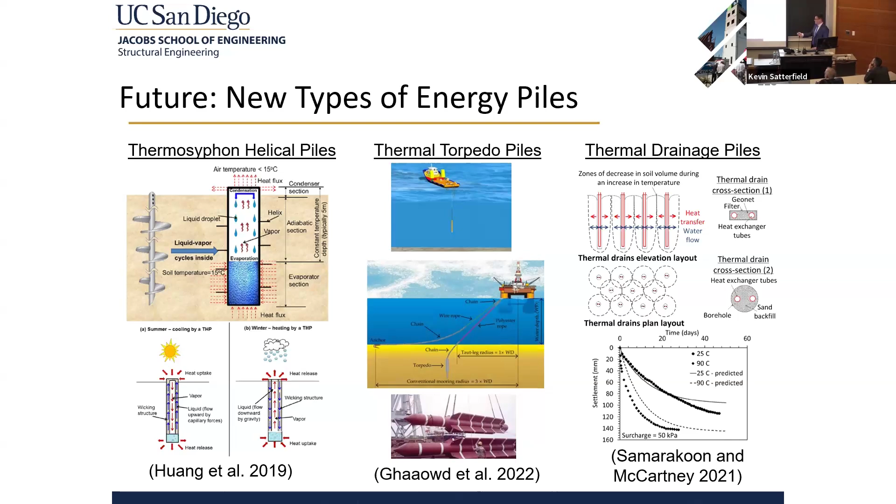And finally, my recently graduated student, Radhavi, was looking at thermal drains. These would be maybe porous piles that you would install in the ground, and instead of just pressurization of the water causing water to flow away, water would actually also flow into the drains themselves. So I think there's a lot of things we can look at in the future to design energy piles in different ways.

So I know I went through a lot of different topics, but hopefully I demonstrated that energy piles are a tried and true technique for heat transfer and building support. There are going to be thermally induced stresses and displacements. We know how to quantify those. We need to make sure they're within limits, but we feel confident that we can do that for different projects.

We always need to think about the effects of heat exchange on soil behavior. When we're having these challenging soil deposits like this clay stone, we need to make sure we don't have drag down effects. And we want to make sure that changes of capacity or deformation don't affect the stability, but also we don't want to affect the efficiency of the system.

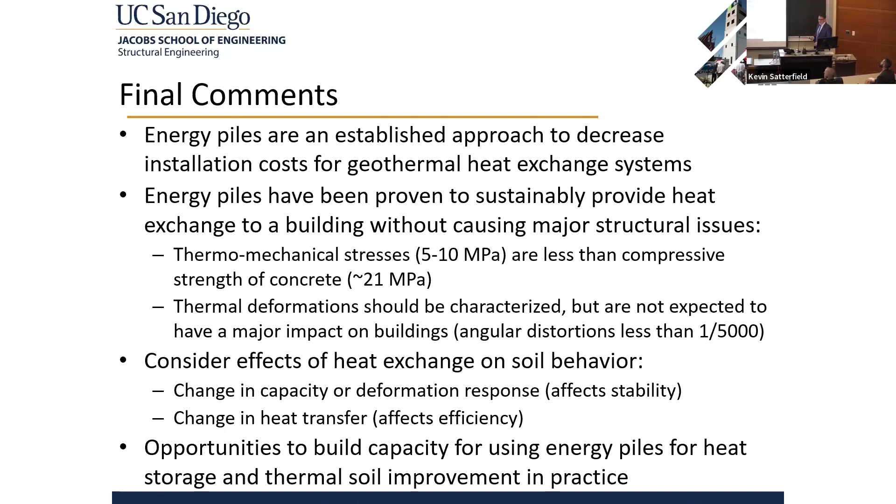And I think there's a lot of opportunities to use energy piles in different ways to achieve thermal soil improvement, but maybe also environmental enhancement in the long run.